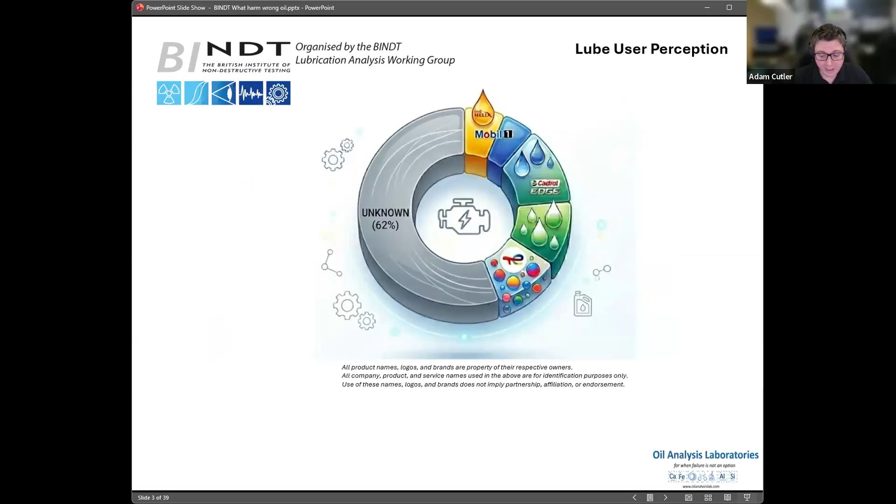If we expand that a little more here, we have what are the most common brands people use - unknown is number 1. Then there's 'I think it's Shell,' 'I think it's Castrol,' 'I think it's synthetic,' or it could be a mix - so it's a mix of one, I topped it up with another. Not knowing the right oil is actually a real problem in the industry.

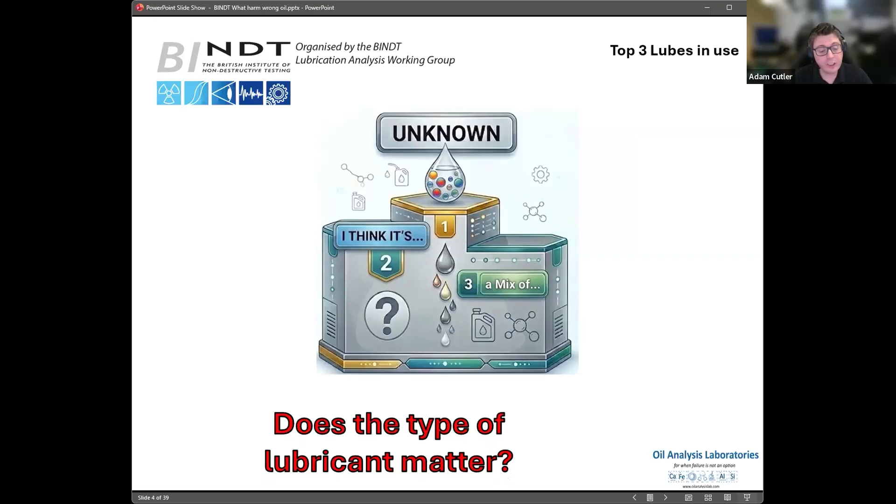Let's talk a little bit about the function of a lubricant. The most obvious one people think of is it reduces friction - separating the surfaces and allowing the components to move past each other. We also think of it as preventing wear - obviously you don't want things to wear. It can also dissipate heat. We also want it to prevent corrosion - so if we get water into the system, we want it to remove it and prevent it from causing corrosion to components. It can also clean.

This can be through additives, so detergents, but also physically just transporting the oil to a filter that does the cleanup job. An overlooked feature is the ability to seal. If you take an engine, for instance, the piston rings are often thought of as sealing, but it's actually that little tiny layer of oil beyond the piston rings, between that and the cylinder liner, that does the final seal to prevent leakage of combustion gases.

And then anyone who's in the hydraulic industry, there will be the ability to transmit power and dampen shock as well. So let's start off with the first one: reducing friction, which is the one that most people think of when you think about what's the function of a lubricant.

So what affects friction? Well, there's a few factors, but one of the key ones is the viscosity. Viscosity is resistance to flow, but in layman's terms, it's how thick an oil is. We can see here, on the left-hand side we've got a very thin oil, and on the right-hand side a very thick oil. Obviously it has more resistance pouring from one container to the other, so it pours more slowly when it's a thicker oil.

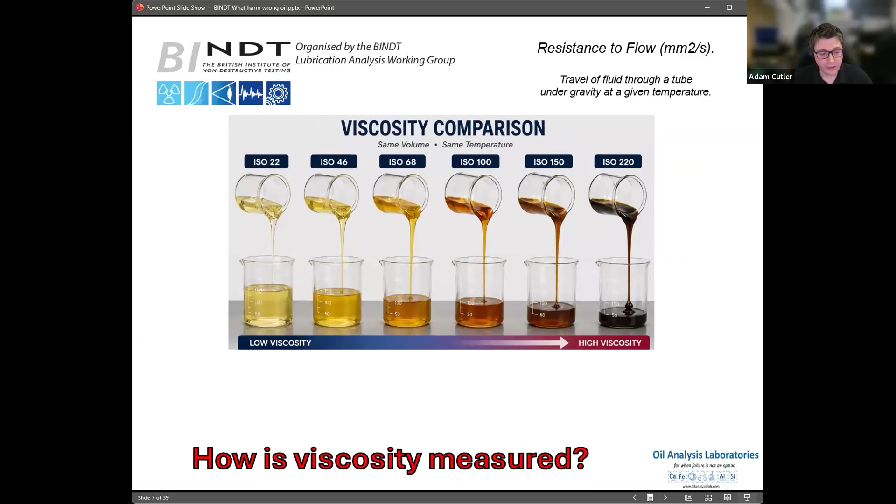So how do we measure viscosity? There's several ways of measuring it, but a common way of doing it is kinematic viscosity, where you have an oil-filled bath, and under gravity we drop the oil down one end of a viscometer tube. It then reaches the final point at the bottom under controlled temperature, and by the time it takes to get from one point to the other, we know how thick the oil is.

So if we just take this bath here, on the left-hand side I've got three tubes I've highlighted for you on screen. You can see I've highlighted those there. If we put some oil down each of these tubes now, we can see that this one on the right-hand side has actually hit the bottom before the first one, although that started first. Now the reason for that is a much thicker oil has more resistance to flow, and so takes longer despite starting earlier.

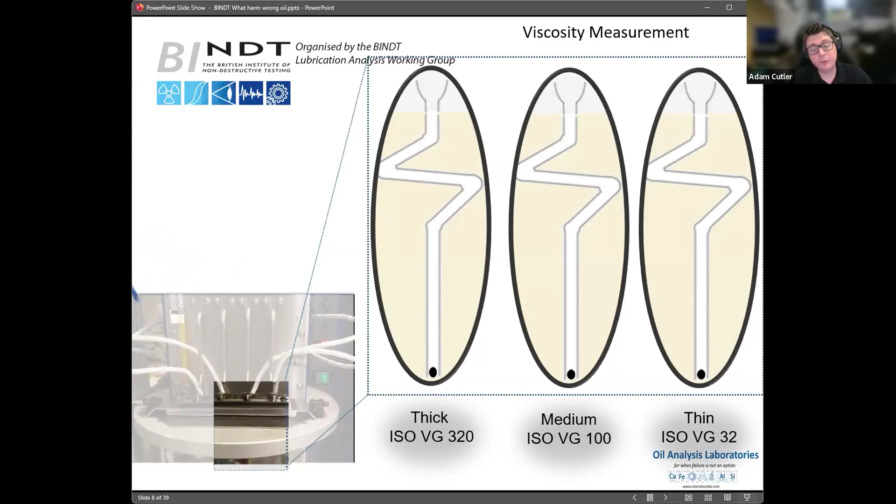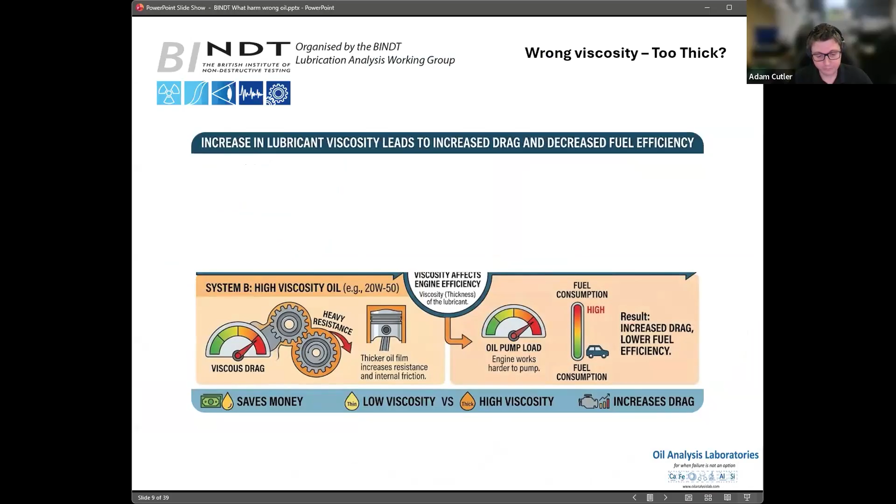So what happens when an oil is too thick? If we think of something like an engine, obviously if you're trying to move components with a very viscous oil, that's going to give a lot of resistance and a lot of drag. That's going to lead to increased pump load and also lower fuel efficiency. Whereas a thinner oil is going to have less drag, so it's going to be easier to flow and easier to pump around, giving better fuel economy. And that's why a lot of modern formulation oils tend to be thinner, because it gives less drag and better fuel economy as a result.

But can it be too thin? This actually brings us into our next area, which is preventing wear.

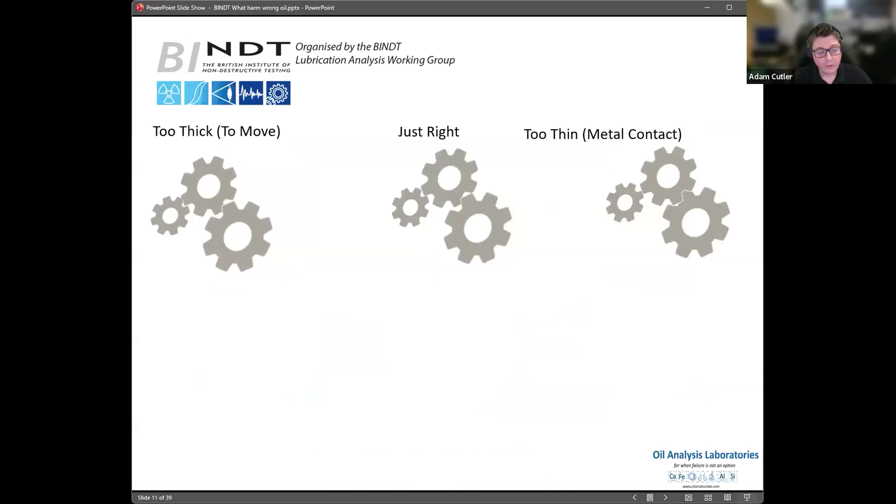So a too-thick oil, as I highlighted before, gives high energy consumption but a really good film thickness. In contrast, if something is too thin, you get better fuel economy, at least at the start, but more risk of metal-to-metal contact. So you don't want an oil that's too thick or too thin. You want this Goldilocks zone of something just right that's thick enough to give surface separation, but not so thick that it leads to increased drag and increased energy consumption.

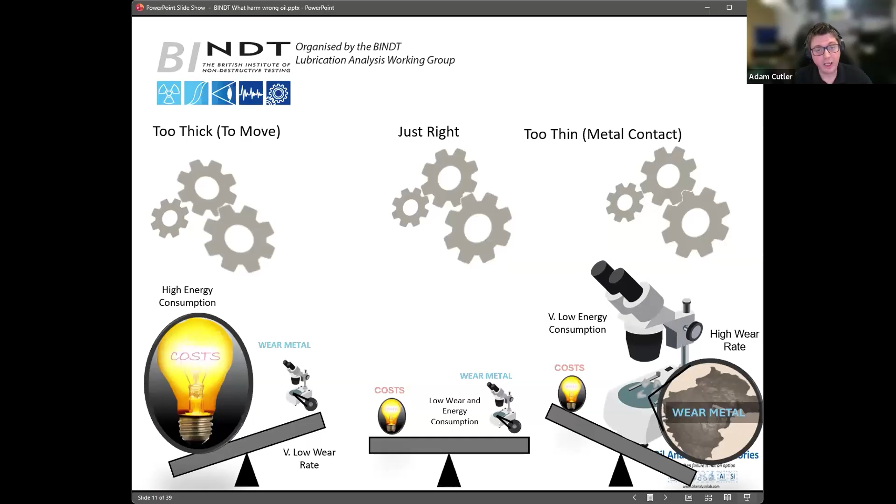So what happens to the film thickness? If we take a brand new component, let's say a plain bearing, as the surfaces move past one another we think of them as being perfectly smooth, and they look perfectly smooth to the naked eye. But at a microscopic level, they have surface imperfections called asperities, which give little peaks and valleys as the surfaces move past one another. You can imagine these will bump into each other as we move them, and as they move past each other, we get material breaking off.

These deposits then react with lubricant additives and form what's called a shear mix layer, or boundary lubrication. Under normal circumstances, you have the full fluid film thickness, with the oil separating the components. But under reasonable load, not overloading, you can have the actual surfaces come into contact just through the additives themselves. If you take this too far, though, you get metal-to-metal contact, which is abnormal wear. So boundary lubrication is typically normal wear, but if you overwhelm that, you get abnormal wear, and metal-to-metal contact leads to sliding wear.

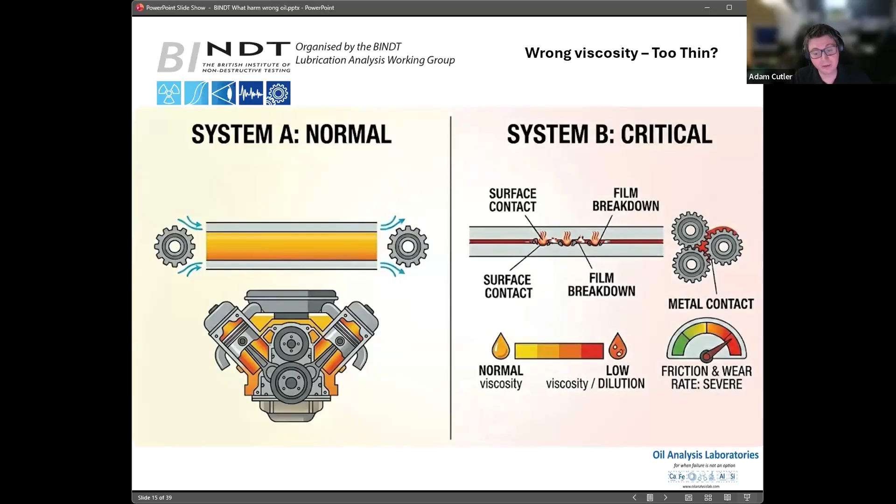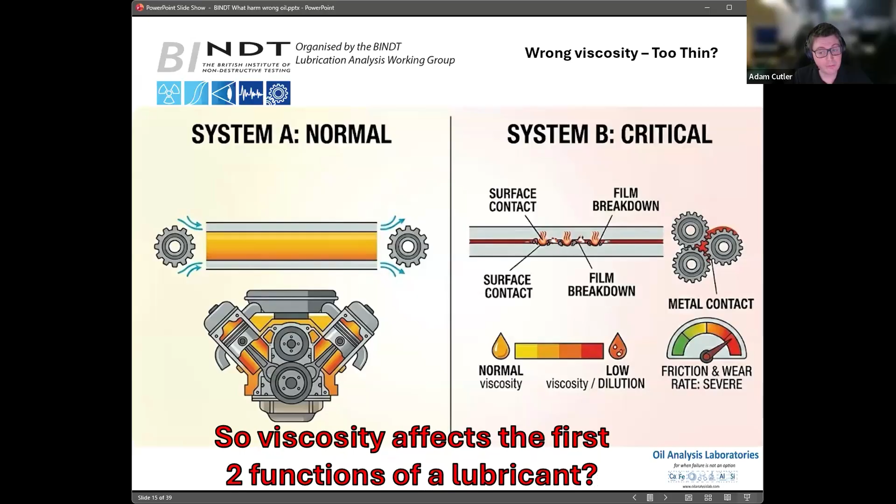So I've already pointed out that viscosity affects the first two functions of a lubricant. And that's because viscosity is the most important property of a lubricant. So much so, I'm going to talk about it again now. So we talk about dissipating heat, and we talk about viscosity index.

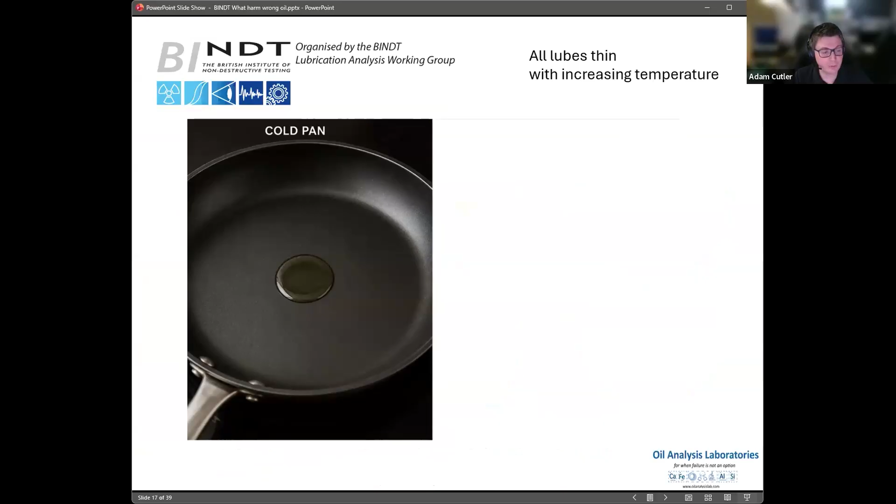So I described earlier when we talked about viscosity that we have a temperature controlled bath. Now that's because all oils thin with increasing temperature. So if we just take a classic thing, I always think of this when I'm cooking: if I've got a cold pan here and I put a blob of oil in it, when I heat it, that oil spreads out across the pan. That's because it is reduced in viscosity and so has less resistance to flow, so it flows around the pan much easier.

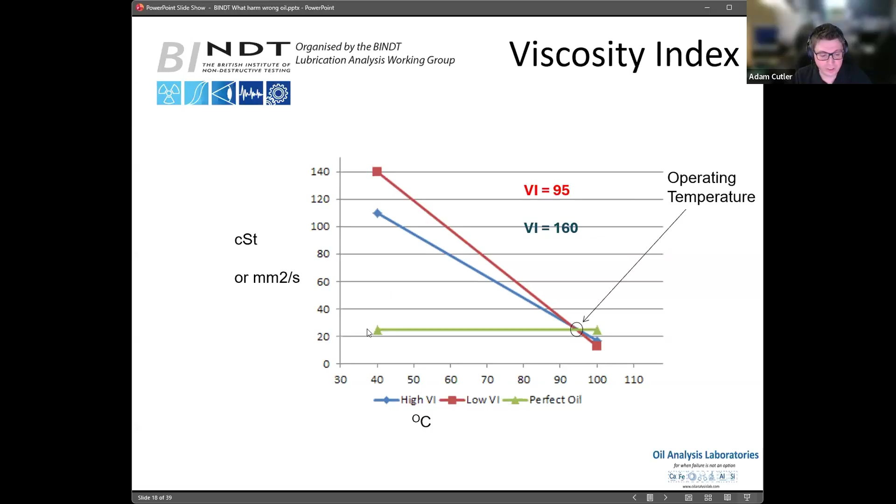So who will this suit? Someone who's working in these cold conditions, trying to start the engine—they want this to be as close to this perfect line as possible because they want it to not get too thick when they're at colder temperatures.

But this doesn't necessarily suit everyone. If we take an oil that is being used to transfer heat away from a component, you actually want it, as soon as it heats up, to get very thin very fast so it can flow away and allow fresh cool oil to go and cool down the component. So a very, very low viscosity index would be desirable in those circumstances, as opposed to the high viscosity index when you want good temperature stability.

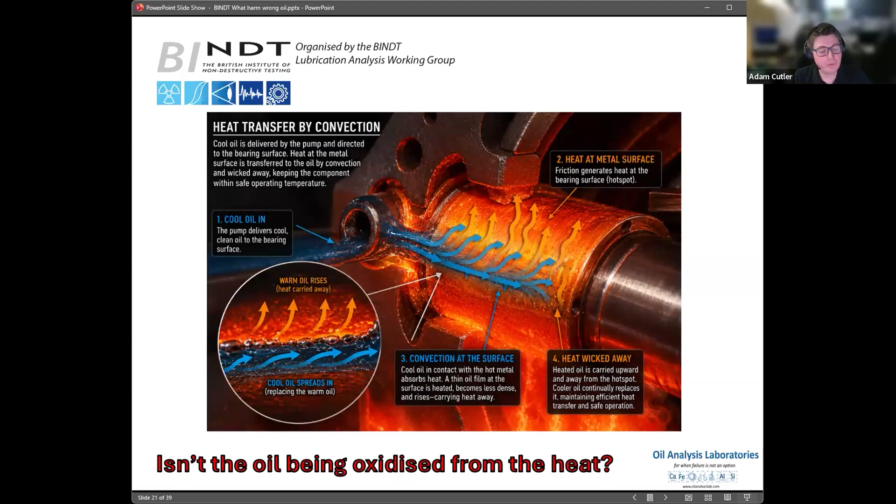So another thing you may be thinking of: isn't the oil being oxidized from the heat here? So this is where we come on to prevention of rust, corrosion and oxidation. All lubricants contain anti-rust and antioxidant additives, called an R&O additive package. So all oils contain these in their lubricant formulations—it's part of the basic oil formulation.

So you could argue, are all oils suitable for corrosion prevention? Well, it depends. If we take something like an ester—there are several types—some key properties: a phosphate ester has good fire resistance. A biodegradable ester, by the name, has good environmental credentials, but they're also good solvents, and they tend to have very high viscosity indexes as well. So all these could be desirable properties.

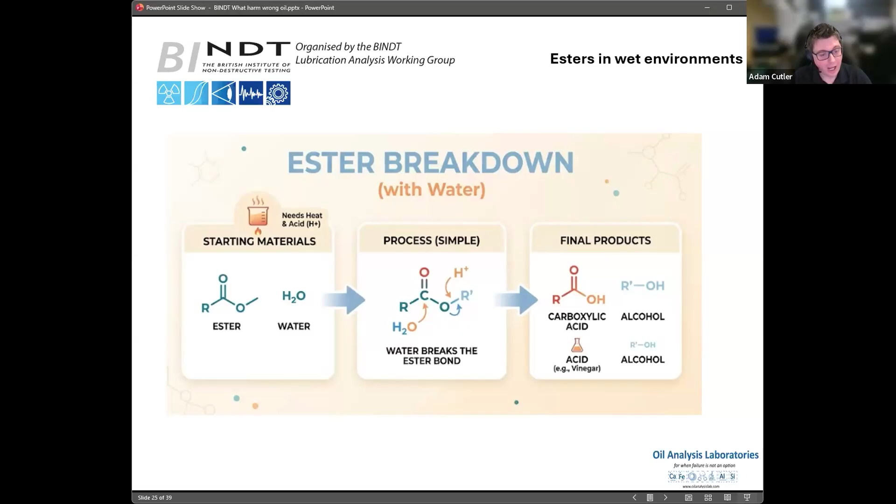And they'll all have rust and antioxidant additives in their additive package, but esters are made from acid plus alcohol equals ester plus water—but we can reverse that reaction. So if we add water, we can split the ester back into an acid, and that acid can cause corrosion. So in this case, a wet environment is not the ideal circumstance to use an ester-based lubricant.

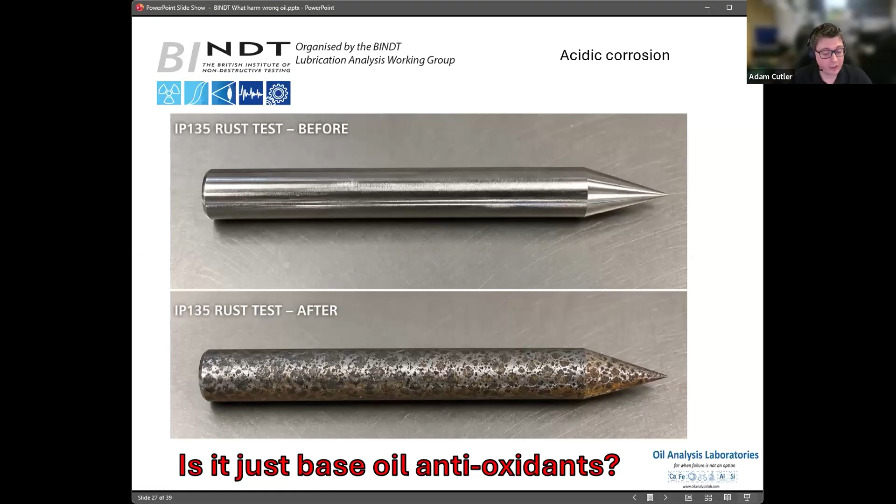It can also be other additives. A common one is EP, extreme pressure additive, used in many gear oils, which gives that sulfury, unpleasant smell you notice in gear oils. These are really good for wear protection, but one disadvantage is that EP can attack copper components, which can eventually lead to copper sulfide formation and, over a very long time, tarnishing and dissolving of components in a gearbox.

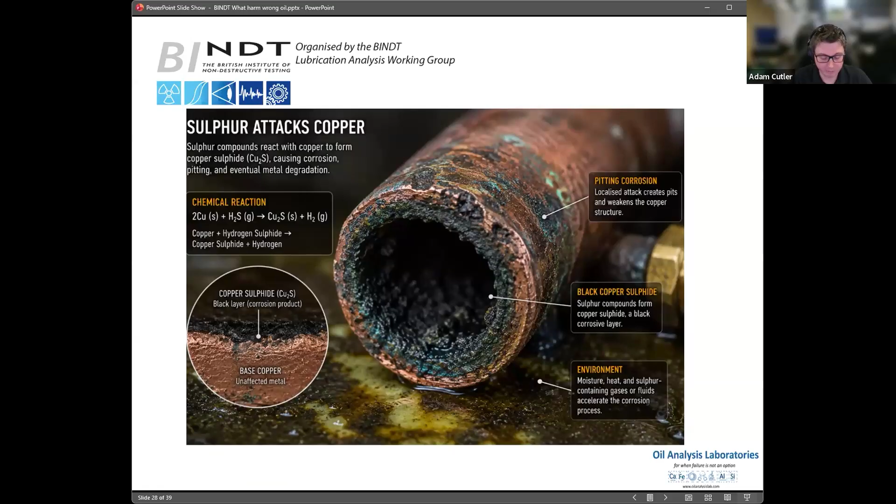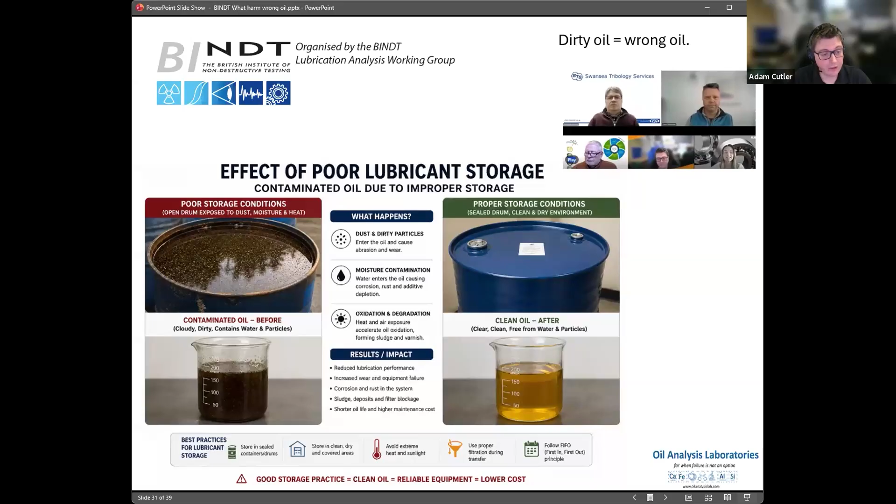The function of a lubricant also includes cleaning and transporting debris. What I want you to get from this is that dirty oil is the wrong oil - if the oil is dirty, it's not the right oil for you. I won't go too much into this, because the next presentation will be Dimitri's, so you've got something to look forward to hear more about contamination effects.

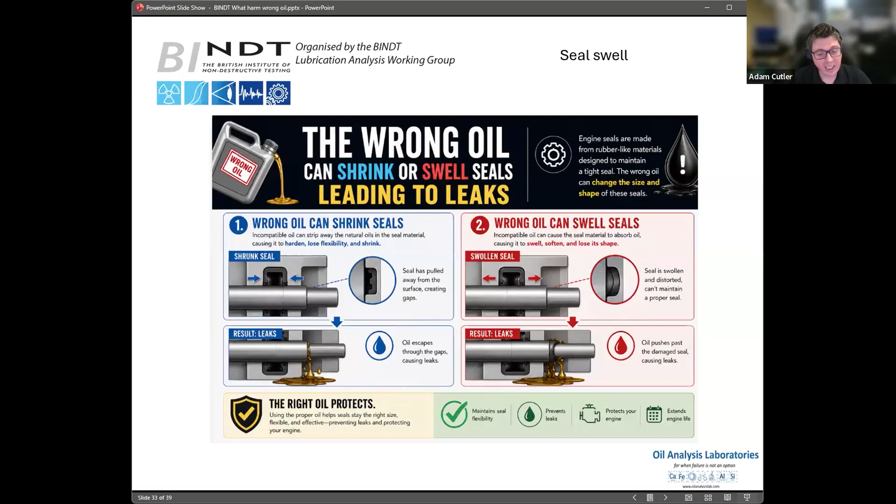Lubricants are also required to seal, as I mentioned before. A common issue is when switching from one brand or type of oil to another in large lubricated systems, which can lead to shrinkage or swelling of seals, causing them not to sit right in the housing and leading to small leaks throughout the system. This is one of the things to check when switching large oil and lubrication systems - seal compatibility.

Some ways you can do this: you can measure an aniline point, essentially the aromaticity of the product, which gives an indication of how compatible the oils will be. You can also do direct specimen testing - take one of the seals with the old oil and the new oil and see what the swell effects would be on that specimen.

We also want lubricants to dampen shock and transmit power. If any of you have ever put your foot on the brakes and it hasn't gone too well, this can be down to air in the brakes. Obviously that's a safety issue, but this also happens in anything involving hydraulic power.

Air is compressible, so foam in a lubricant or a high air release tendency can lead to uncontrolled movements and safety issues. But also, over time, because air is compressible, that air gets superheated, and the heated air will burn the oil around it and form little soot particles - a process called microdieseling, where the oil actually starts to soot over time.

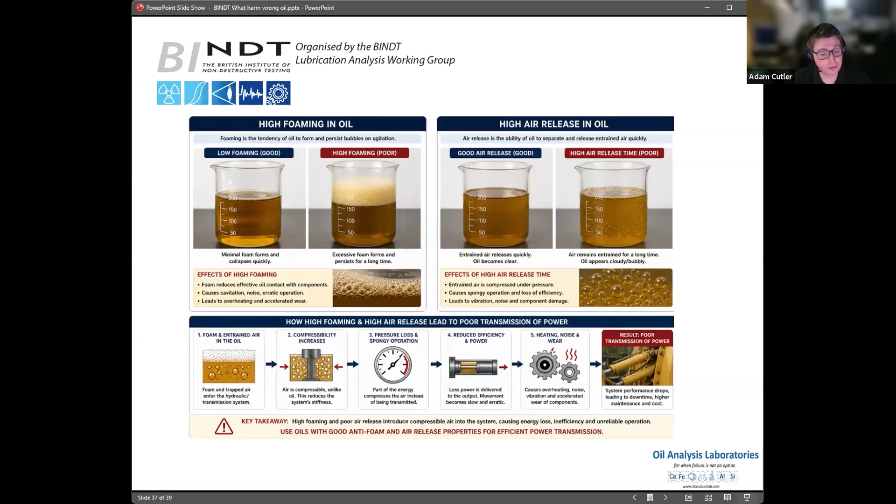In conclusion, oil analysis assesses all these parameters and looks at whether you've got the right oil for the right purpose. It looks at viscosity, to see if you've got the right film thickness; elemental analysis, to see if you're getting wear and have the right additive pack; infrared, to confirm you've got the right type of lubricant; and viscosity index, to see if the oil is working correctly across different temperature ranges. It also measures how spent a lubricant's additives are and how much resistance a new lubricant has to depletion, as well as corrosion, air handling, and water handling properties - and all of this can be found out from a single oil sample.

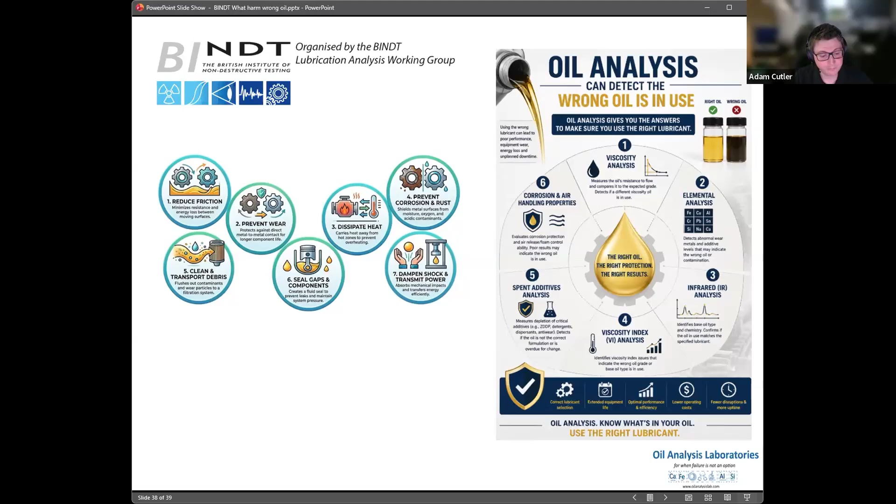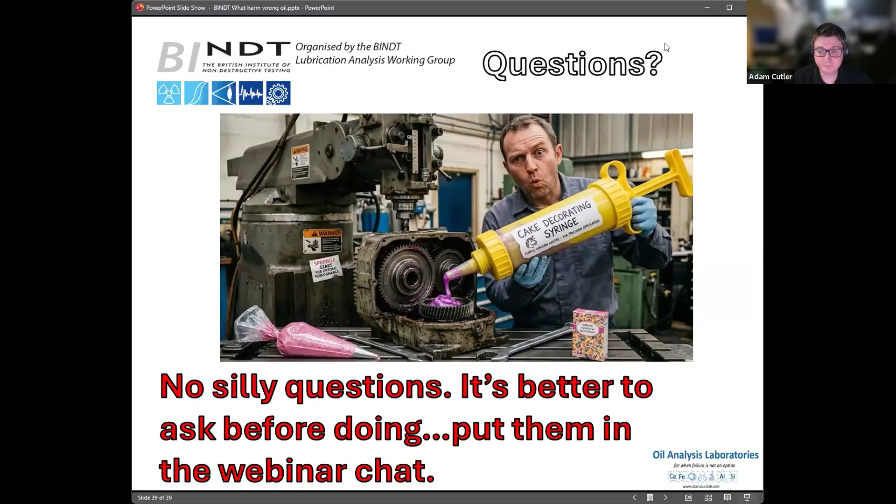Thank you, Adam. That opening message that you started with is really key. The most common oil type in use is unknown. My background is oil analysis lab, the same as everyone presenting today, and that resonates with us all massively. And I think it's very important information that's often overlooked by end users. It's very difficult for us to distinguish between some contaminants and additives or failures if we're unsure what we're dealing with in the first place. We often have end users claim that they don't have lubrication issues, so hopefully your presentation today has shown that a lubrication issue doesn't always appear to be mechanical on site.

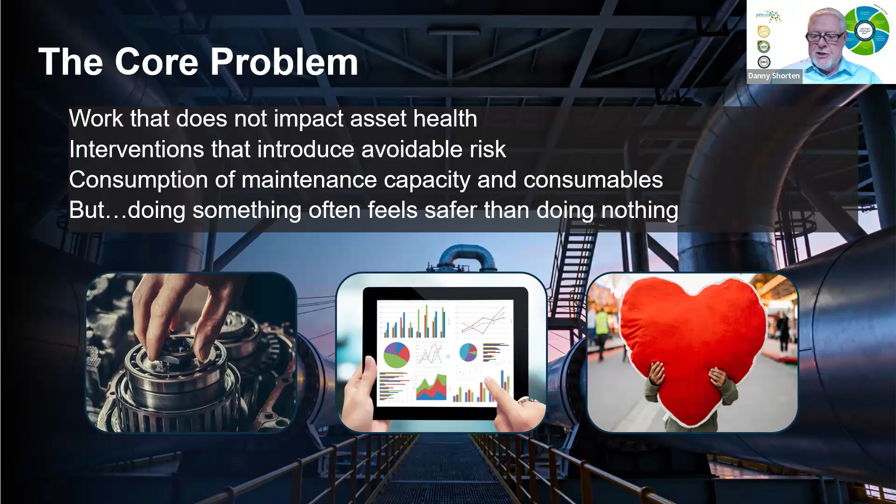So we're consuming maintenance capacity and the consumables, but we're not really aware of whether that's necessary or not. However, doing something often feels better than doing nothing, and I'm going to argue the case that actually doing nothing sometimes is actually better than doing something.

Now, when we look at a sort of medium-sized site, the calendar structure would normally look like this. So if you've had an oil survey or you've updated your maintenance management processes recently, you'll be doing oil analysis on probably your critical items. And these will tend to be driven by the sump size, i.e. the ones with the most oil in, or the criticality to operation. And you'll be sampling them on a monthly or quarterly basis.

The smaller systems, where you are not really happy to make a commercial decision to take an oil sample, box it off, send it to a laboratory 4 times a year or 12 times a year, these will be on some kind of fixed schedule. Nominally, a 3-year oil change and an inspection process for top-ups. Your grease systems will be visited according to a calendar schedule. Somebody will walk a line with a grease gun and they will apply grease according to that schedule.

So the truth of the matter is, let's say in this example we've got 250 lubricated sumps, only 10% of those are going to be sampled, so you've only got knowledge of the internal condition of the oil and the machine in 10% of those assets. So 225 are unknown commodities.

Now we can inspect from the outside, we can have a look for leaks, we can do all sorts of stuff, but we don't really know what the condition of the oil is, so we're going to change it based on a calendar basis. So 225 oil changes we're going to do whether we need to or not. And that equates to about 75 oil changes annually. So that's more than one a week if you spread it out.

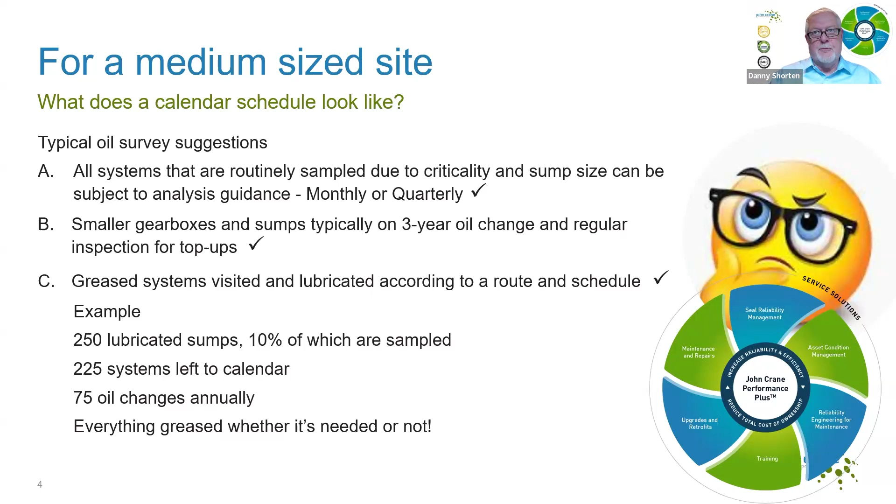And in addition, everything is greased whether it needs to be or not. And that leads to a problem because we can under and over grease systems and we may or may not know what we're doing. So can we do it differently?

This is the question I want to ask everybody. Can the oil be changed or a system re-greased only when it's necessary? Well, the answer is of course yes, but there's a commercial consideration as to how we achieve that knowledge.

So if we know that the oil is unsuitable for further service, then we'll change it. But if it's okay, we can leave it, but we need that knowledge. If we know it's contaminated beyond repair, so it's something a filtration system can't deal with, then we can change it and we can clean it. But if it's clean, just leave it.

If the oil's degraded, same thing. Change it or leave it. But if we can prove that we don't need to do it, then we can leave it. And it's not negligent, it's an active decision. So we're actually changing something from a scheduled activity to a decision window.

Now the sort of things that we can do on site, for instance, because the solution is to test on site, is to look for the issues Adam was talking about earlier. Is it the right oil? Is it wet? Is it dirty? Has it aged? And there are on-site tests we can do for that.

We're not concerned here about machine condition, we're simply interested in the condition of the oil, i.e. can we leave it there or do we need to change it? So I'm not really interested at this stage in wear metals. If I was, I would send it to a laboratory or I'd build a mini lab on site to do that, but this is not the purpose of the discussion today.

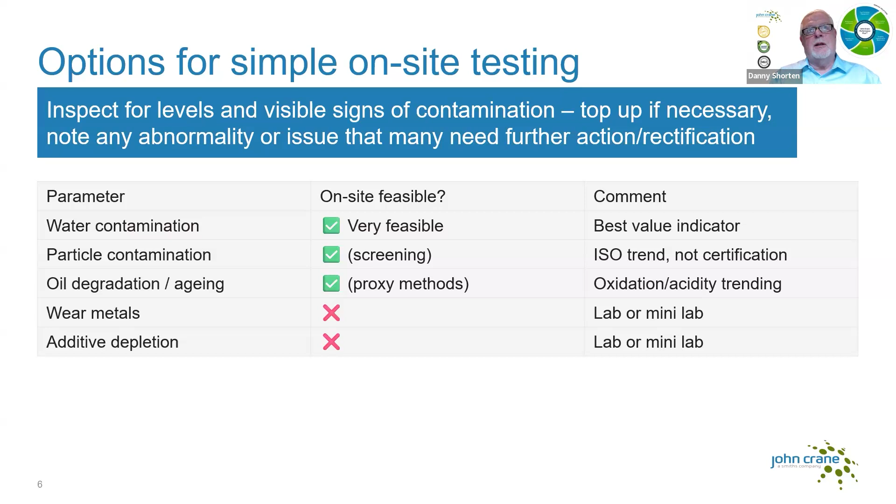Similarly with additive depletion, we're not really looking at that, although there are some devices that can help us. So what tools are available? Now this of course depends on the commercial argument for doing on-site analysis.

We can do simple things with water, such as a crackle test. We can do more involved testing using, for instance, the Spectro Fluid Scan handheld IR, which is quite a high value asset, but gives us a lot of information around the condition of the oil. So that can produce a go or no go, but there are costs involved there.

We can do patch testing where we actually take an oil sample and provide a filter patch, and we can use microscopy. There are other devices which can look at relative contamination and oxidation, and field tests for TAN, for water, etc.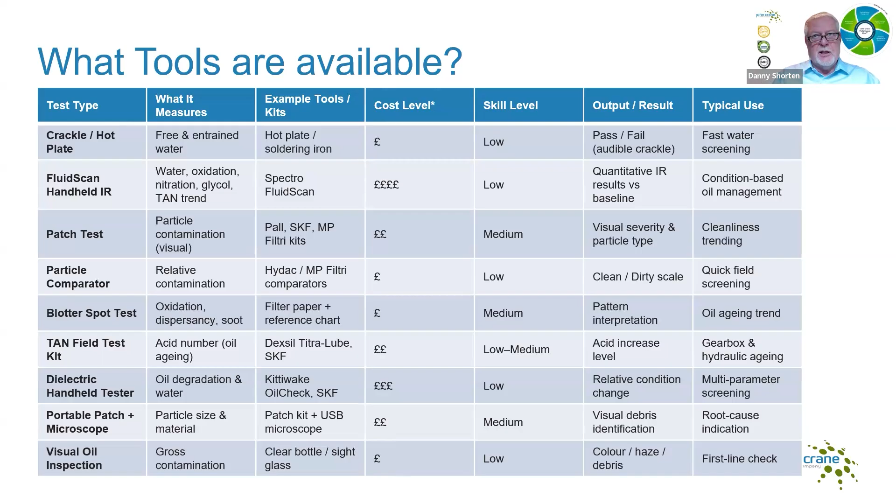Now, I'm not going to get into the solutions here, but there are many opportunities and options to do this. Now, what my view is, because we've got a massive proliferation of sensors and we're using AI, we can use an off-site laboratory, and I certainly wouldn't suggest moving away from that. We can also do stuff on site as well, and we can gain knowledge about our equipment, even if it's very basic knowledge - we take a very small sample and do some kind of qualitative assessment. This is good sense - we're managing the risk, not just ignoring it.

So any system managed by a calendar leads to unknowns and represents a risk. I recently went to a company and they said, we don't change oils, we don't have problems with gearbox failures. When we dug a bit deeper, they were just used to doing refurbishments at a frequency which I would have considered to be excessive, but that was business as usual for those guys. So you may or may not know you've got an issue that you can improve on.

We tend to manage risks we're aware of by over-maintaining, and in doing so we introduce more risk. If we take a component out of service to do something to it and put it back into service, we actually create a new infant, and therefore because it's now a new asset, we're introducing a new risk because it's further down what we call the PF curve, where the potential for failure is increasing simply because we've taken it apart and put it back together. So the argument here is working smarter, not harder, and certainly not deferring without any understanding of risk.

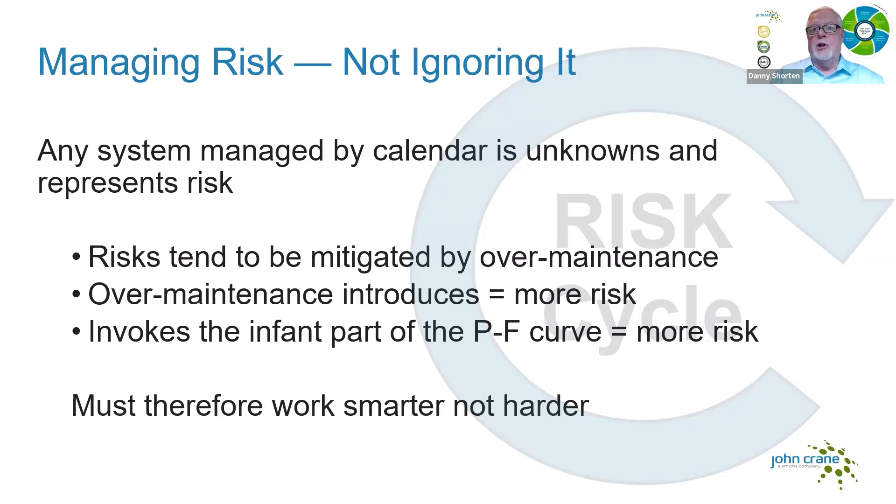So we need to have the knowledge in order to make the decision. Now, we've done some work on a number of sites, and we can report quite confidently that there's likely between a 10 and 30% reduction in oil consumption, which at the moment is quite a critical thing to talk about, based upon what's going on in the world and the knowledge that we're going to have supply issues, not only from the base oil and the refineries, but some of the finished products are going to be hard to get.

You'll probably have seen some messaging from distributors or oil companies that pricing is going to be impacted. But we're also going to see potentially a significant reduction in lubrication-related work orders, i.e. stuff we do because it's in the schedule but probably don't need to do. If we're not getting involved with those assets unnecessarily, we've got fewer contamination-related failures, and we're more likely to adhere to the schedule because we're doing stuff which is relevant. So why does this matter?

Well, the standards of our operations influence behaviour. If anybody's ever done an assessment of any company's lubrication management, they will very soon realise that it's the culture of lubrication which is often at fault. Not necessarily individual fault - it's a corporate culture around lubrication management where it's been effectively flattened and forgotten about, and it's assumed to be running within reason.

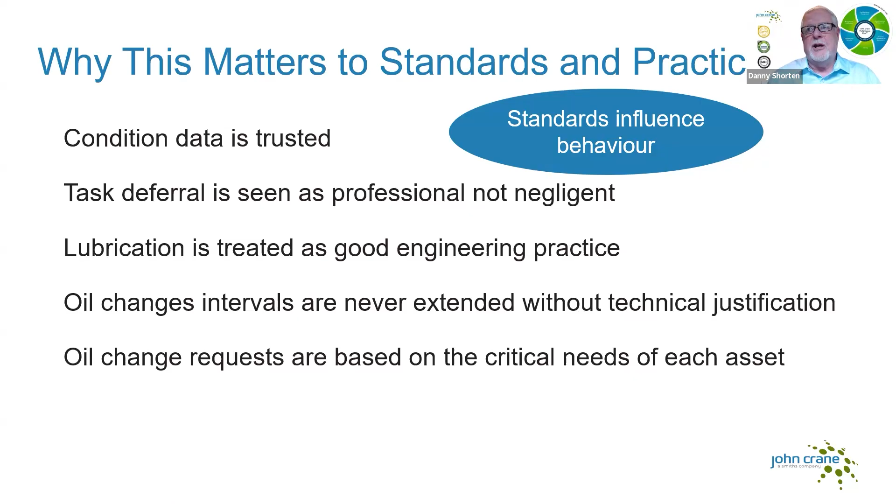So why does this matter? Well, if you're using fixed time-based intervals, there is no relevance to the need of the asset. This is simply a tool to make work planning easier. It doesn't necessarily give you any value.

If we're looking at OEM guidance, for instance, when you look at the handbook, they'll say perform an oil change every 70 miles or 70 hours or whatever. And I would argue that if you're taking an industrial gearbox, the amount of potential context that gearbox can be put into is going to be much more significant than the handbook's going to really relate to. So the handbook, in many ways, protects the manufacturer from negligence because it can hold its hands up during warranty and say, you didn't follow our instructions. But out of warranty, it has no value.

So actually, maintaining the condition of the oil is very much relevant to your operation and your condition. And that may mean changing it more frequently or actually less frequently.

The problem with schedules, again, it's very much focused on convenience. It's about the planning aspect, not necessarily the needs of the asset. And when you have something which is not based on the needs of the asset, schedule compliance, which is very often a metric that we use to measure how good we are, has no relationship to the reliability. It means you've done something, but it doesn't necessarily mean you've gained any benefit.

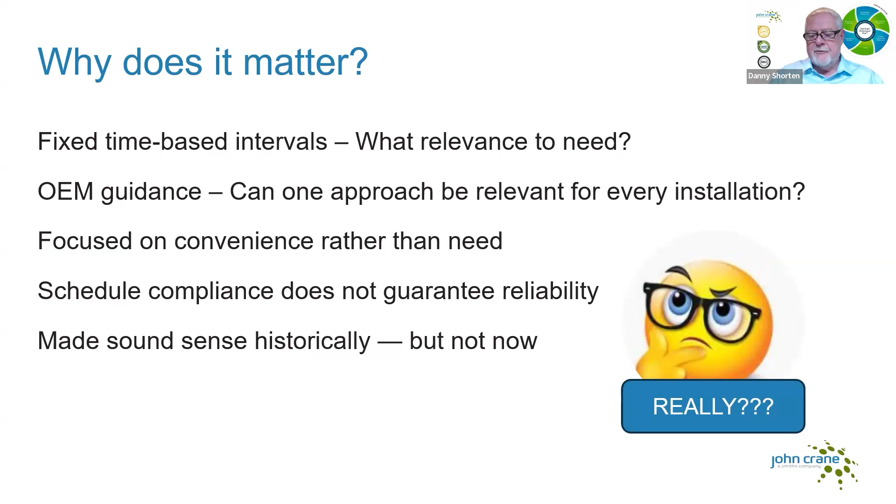And these, I think one would argue, historically were very sound views, but this now is changing because we can access more knowledge and have the ability to make better decisions.

So what costs happen? Well, we have to pay for labour, we have to take the asset out of commission, we've got to manage any spills and contamination, we've got to expose individuals to health and safety issues, we've got waste, we've got potential errors due to human errors and perhaps training issues. And of course, we're now focused on work that is not rewarding us. We're focused on work which is simply a scheduled compliance task, creating unnecessary work, unnecessary costs, and unnecessary risk.

So instead of seeing an oil change interval, why not make it a decision window? This puts the power back into the engineer and the reliability management in actually to do something that adds value, or to avoid it in the knowledge that risk is still being managed.

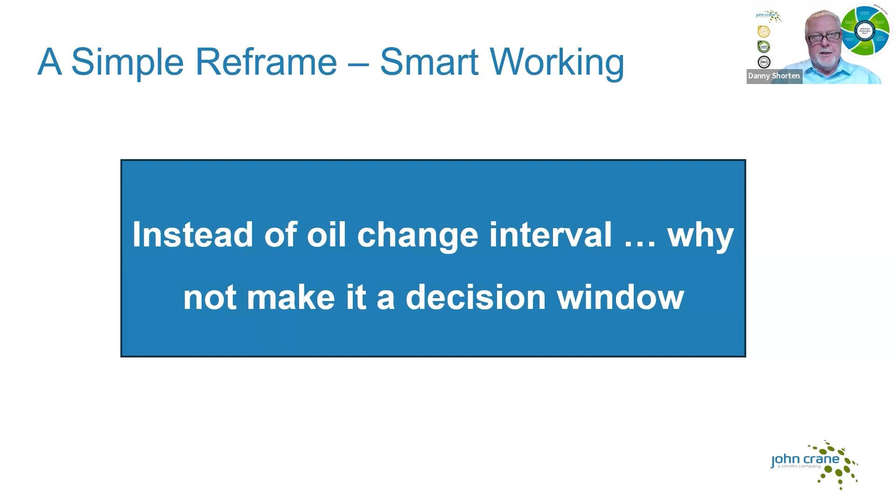So when we're using a decision window, when we get to the prize, we can define the acceptance limits and alarms for every system. We make decisions based on evidence as opposed to simply because it's time to do something, because it's the 4th of June and that's what we do on the 4th of June. We've got a clear authority to defer and extend oil change interval with time and date stamped verification of status, which gives us a feedback loop to confirm these decisions are safe. And we have confident knowledge of condition.

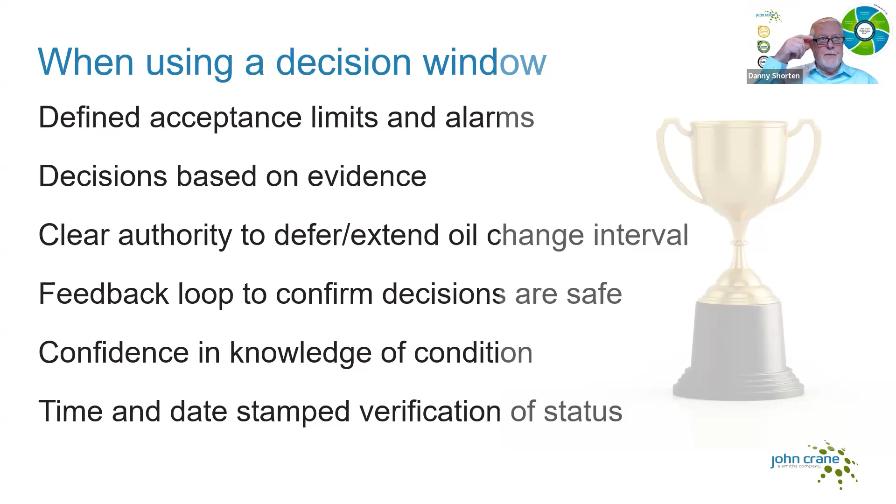And in the first year of the trial, they actively identified that 90% of the systems did not require oil change. Now, over time, that number will drop because oil will require changing at some stage. But they actually avoided oil change on over 2,000 systems. And their calculation, not mine, was actually quite significant in terms of the first year. And they recovered their capital investment also quite quickly in that period of time.

Now, noting that that capital is probably going to need replacing in 5 years, they've got 4 years of access with the only cost being actually taking the sample. Their prediction long term is to permanently eliminate 50% of the previously scheduled oil changes through a condition-based decision making with appropriate risk management. And they are now mapping this out to other sites.

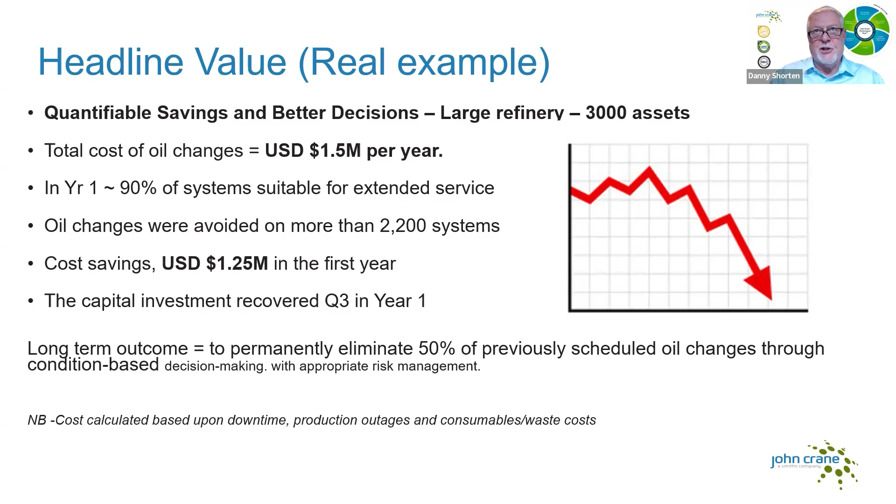Now, admittedly, this is a large group of assets and that may not be relevant for everywhere. But the process suggests that at least we should ask the question, is there an opportunity to move, maybe not all of the assets you don't put in an oil condition monitoring program, but some more assets into that so we can avoid unnecessary oil changes.

So I'm coming to the end of my 20 minutes. My key takeaways are scheduled oil changes feel safe, but they add cost, and we can see that cost can be quite considerable.

Condition data, if we can acquire it and trend it, adds a degree of certainty to our decision-making processes. And this new activity does not necessarily require any significant training or upskilling. We use very competent people generally, and giving them the skills and awareness to take lubrication to another level is quite straightforward, so long as it's built into the culture. So we also get value from avoided work, the risk reduction, and the added assurance that we are actually working based on data and intelligence.

And as you've seen, the value can be significant for medium to large size asset populations. And that ends my discussion today, and I thank you very much for your attention. Please, if there are any questions, we'll get round to it in the panel at the end. But for now, thank you.

Thank you, Danny. You have had a question come through, so I've made a note for that for later on. Condition-based lubrication is something which people are adopting more across all industries, and as you've shown, sometimes doing too much can cause problems, even in the smallest of oil or grease reservoirs. Understanding the condition is invaluable for improved reliability and sustainability, especially in this time of worry with lubricant supply. We certainly don't want to be changing oils and greases just because.

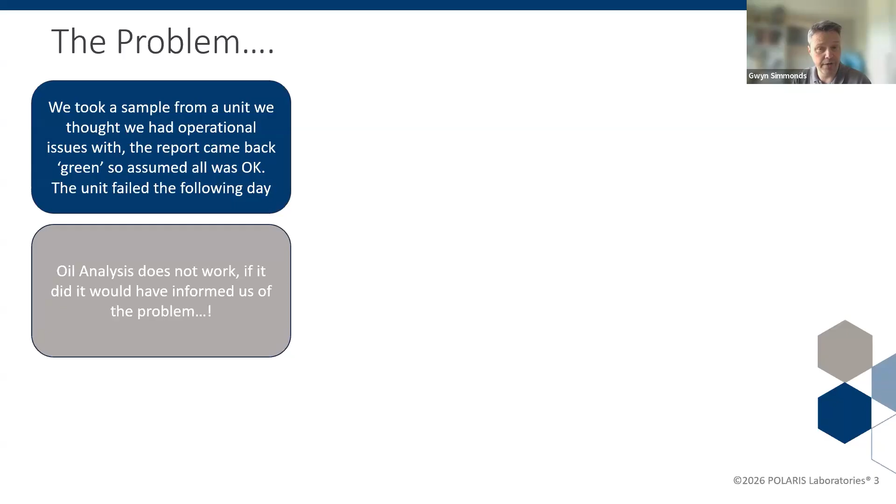So they then followed up with, oil analysis doesn't work. If oil analysis did work, it would have informed us of the problem. We may have saved or done some remedial maintenance on this piece of equipment to find the problem before it failed catastrophically. Oil analysis should have and could have given us the information and informed them of what that problem was.

They also followed up with, in fact, there have been a number of issues over recent years, not just with Polaris, but we transitioned to Polaris from a previous provider a couple of years ago, and there have been other issues where oil analysis has not picked up problems with pieces of equipment. Now, we all know from an operational standpoint, you can get catastrophic failures which oil analysis may or may not pick up.

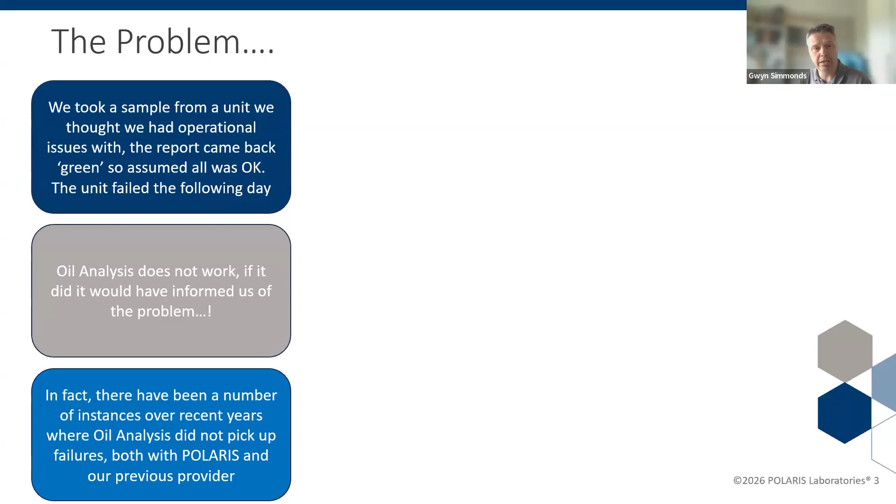But they had a general perception that it was potentially a waste of money. Now, was this because they were just paying lip service to it? Was it something they do because they've already done it? Again, it's important to find out the fundamentals of why this is their perception of oil analysis.

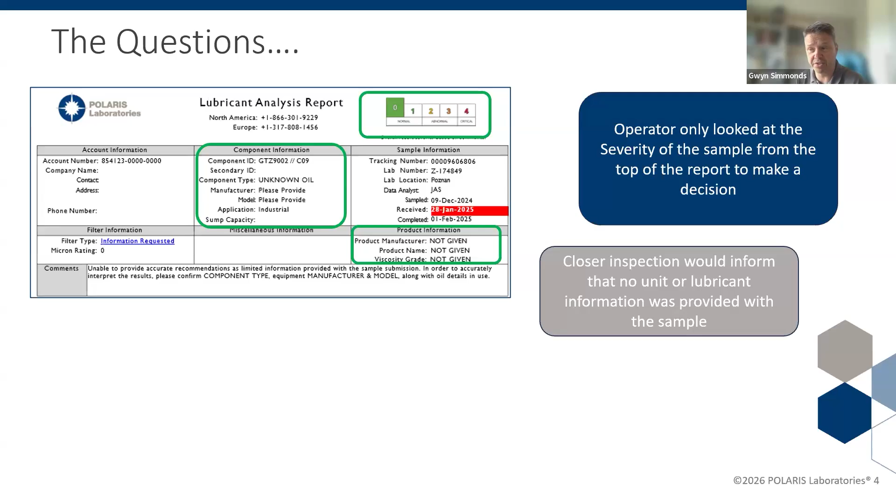Unknown. And this is an exact example of that. So it doesn't give us, as the lab, any information of what we're working with, or what we're trying to recommend.

And if the user had actually read the comments on the report - to be able to provide accurate recommendations, as limited information is provided with the sample, in order to accurately interpret these results, please confirm component type, the piece of equipment, the manufacturer and model, along with the lubricant details in use. Now, if that user had read those comments, they may not have made the decision not to do anything with this piece of equipment which failed the following day.

If they'd have read that in more detail, rather than paying lip service to 'we've taken a sample, we've sent it, there's nothing wrong' - understanding what information is on the report is just as important as looking at the overall severity as well. So really, the problem lied with the information we were provided by the operator, by the end user, with this particular individual sample from this equipment that fundamentally failed.

So for the rest of this session now, I'm going to explain that oil analysis does work, and here are some of the solutions based on providing accurate and informed data to the laboratory when sending samples in.

So what is the solution? Well, firstly, we need to take a step back and do a complete review of all of the data related to that program. That is the asset lists, the equipment lists, all of the information that's relevant to the lab when testing and interpreting that data related to that piece of equipment or those customers' fleet of machines that they're taking samples from.

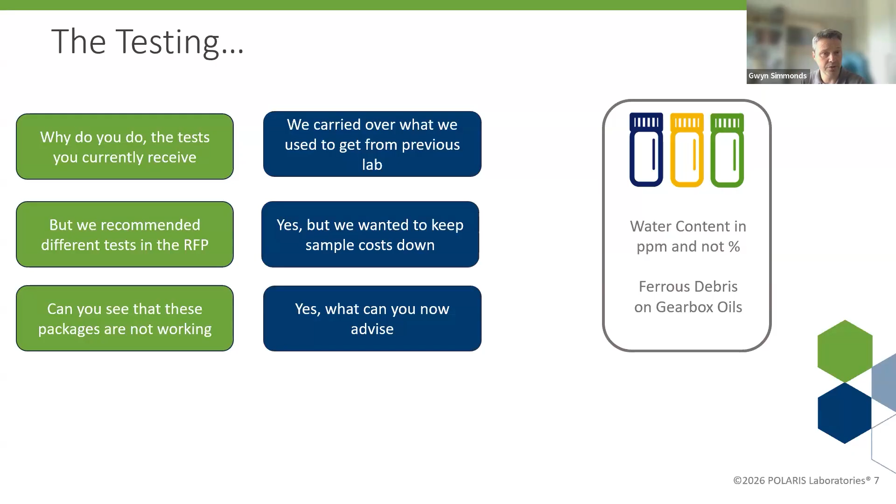A couple of the low-hanging fruit: they weren't performing water content in parts per million, just doing a carte blanche percentage across the board. Now if the percentage is via a hot plate method or an FTIR, that hasn't got the limit of detection to go down to maybe 200 or 400 parts per million, which could be the condemning limit for water contamination in some industrial applications. More critically, they weren't doing a ferrous debris test on their gearbox oils, which is vital to understand if there are any larger ferrous or iron wear patterns occurring in those individual gearboxes.

There's probably tens of thousands out there, and also tens of thousands of ISO 320 gear oils. They didn't give us the manufacturer, they didn't give us the model. So additive levels, specifications, formulations all differ. Having that information is critical for us as a laboratory to provide the most accurate information, because that affects not only the interpretation we provide and the severity of the report, but also the comments and recommendations we make and the limits we use based on certain applications.

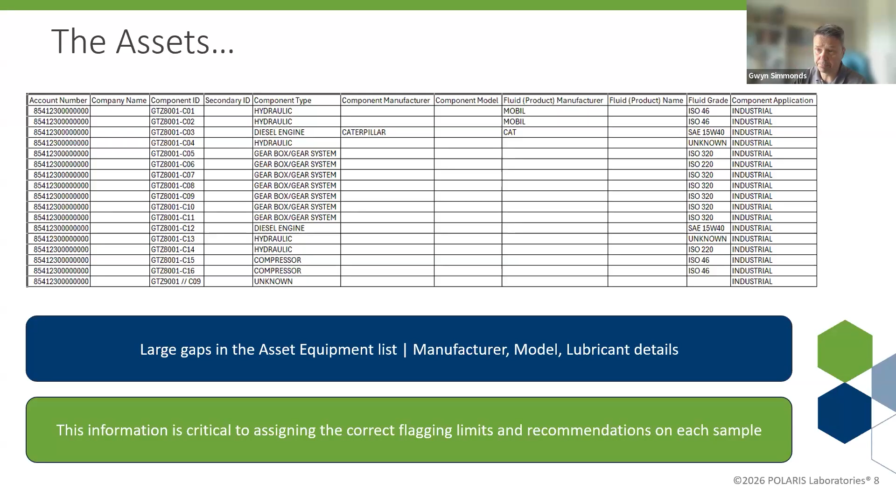And why is that important? Well, if we think of what information a laboratory uses with a sample that comes in, you have the laboratory test results derived from the sample as tested in the lab, and you have the equipment type. It's important to say what kind of engine it is — okay, we've sampled an engine, but is it a diesel engine? Is it a petrol engine? Is it a dual fuel, natural gas, or landfill gas engine? So having that exact type of equipment is important.

What type of gearbox is it? Is it a kiln gearbox? Is it a conveyor gearbox? These all have different applications, different duty cycles, different loads. So having that exact equipment type and application is critical for the most accurate interpretation of an asset.

As I said on the previous slide, the information on the fluid manufacturer, product and grade, as Adam pointed out as well, is vital for the laboratory to interpret against the correct viscosity, but also the correct additive levels and formulations, to ensure that the oil and lubricant in use is exactly as it should be, as taken out of the barrel from the lubricant provider.

And then obviously component manufacturer and model. There are tens of thousands of different engine or compressor manufacturers. They all have different metallurgies and will all wear at different rates as well. So having that definitive information on the manufacturer and modeling of the equipment is critical to ensuring the correct statistical models are used for things like wear and contamination levels.

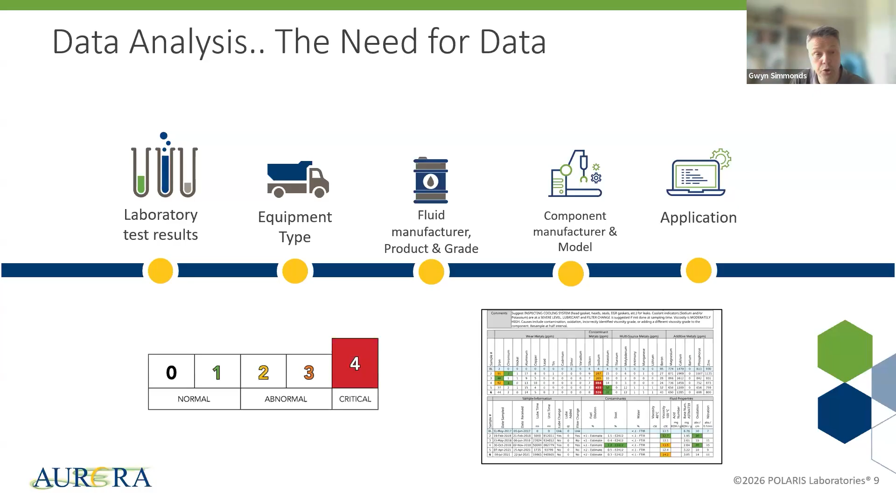There was a comment in the chat that ties into this slide about what are the limits, how do we know what's right and what's wrong. We have a data set of over 25 years, with over 21 million samples, which allows us to have 50 million individual flagging points and over 55,000 flagging templates. That's based on differences in the manufacturer, the model, the lubricant grade, the lubricant manufacturer, and the application as well. So we probably have the largest data set of oil analysis statistics, which allows us to confidently predict and flag certain data sets.

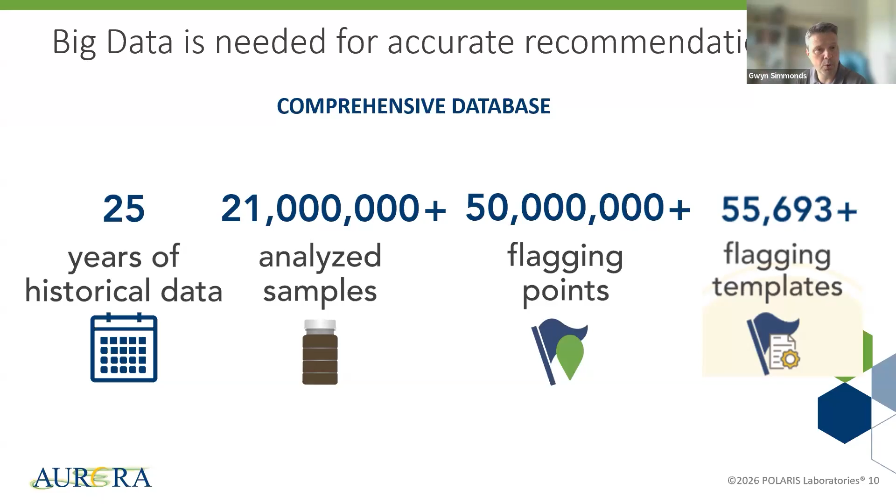Now, if the customer provides us with no information, we can just do a very generic interpretation based on it being a gearbox, using a typical data set or statistical analysis of gearboxes. But the more information the customer provides, the more we can drill down to a much more accurate statistical model in terms of providing that interpretation and recommendations.

So if we think about how important that information coming into the lab is, how do we fill in the blanks? If we take an individual asset where they said there was an impending failure but they didn't give us any information, you can see the manufacturer and model of the equipment was missing, and they gave us minimal information on the fluid type. But once they reviewed their records and found the manufacturer and model, and said we know it's Mobil hydraulic oil M in use, it gives us much better information on what is in use in that equipment. Any laboratory can then become much more prescriptive in their recommendations and flagging for that customer when that information is provided.

Now, Danny touched on AI. AI is becoming very prevalent in our industry in terms of customers extracting data, putting it into their own data sets and models to look at predictive analytics. But AI is only as good as the data set that feeds it. If you have a data set where most of this information is missing, the output from the AI agent is going to be significantly less powerful compared to where you have a fully implemented asset list with full manufacturers, full models, and full details on the lubricant information.

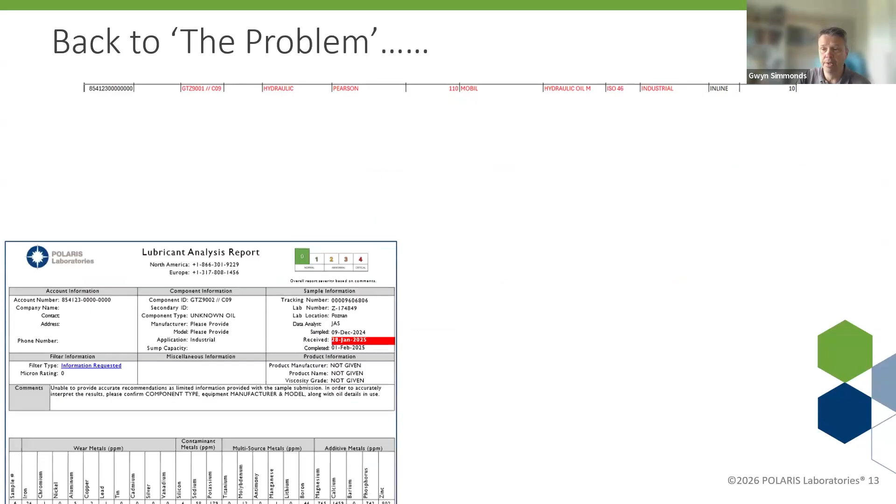So if we go back to the original report we saw on one of the earlier slides, it's unknown oil, unknown lubricant, and the laboratory is unable to provide accurate recommendations without this information.

If we look at the same report, now the customer has provided us with that vital information. We know it's a hydraulic, we know the manufacturer and the model, and they've confirmed the product in use. We can now make a much more informed interpretation and recommendations based on that additional information.

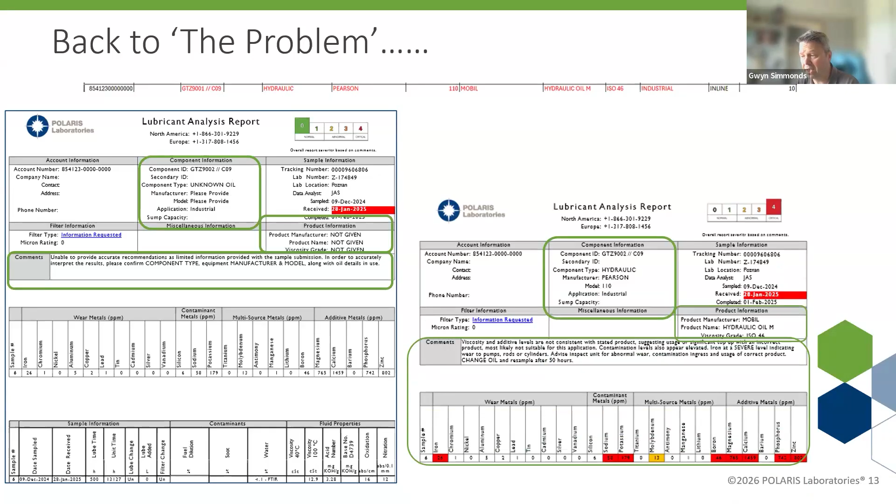And you can see here that a lot of the data is flagged. There's relatively high levels of iron, there's levels of contamination, and it's clear that the additive package in this particular sample is very different to what we'd expect in this hydraulic oil.

So clearly someone's either topped up or used the wrong oil, and therefore our interpretation details that the viscosity and the additive levels aren't consistent with the stated product.

We found ferrous wear, which could be coming from a variety of sources within the system, and the overall severity of the report is now red, or critical, or severe — a marked difference to the original report where we said it was green because everything was normal.

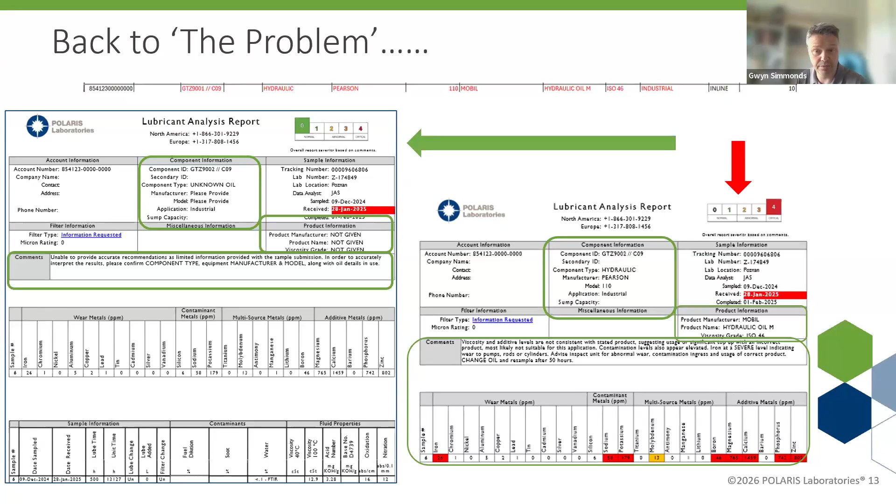So even if they didn't read the report or look at any information, and all they did was look at that top right hand corner, they would have seen it's red — oh, we need to do something. So even without in-depth attention, just the visuals on the report with that additional information would have led them to a problem with this particular piece of equipment that they needed to rectify, hopefully before it failed or was about to fail.

We put all this in place. The customer says, right, we want to keep everything clean. We now believe in oil analysis, we want to keep this kind of consistency moving forward. What are the best options?

Now a lot of labs have a mobile app, and the mobile app can be used for sample submission, allowing you to transfer sample information at the point of sampling to the laboratory. Just think how clean and accurate this is compared to a historical, traditional handwritten form where customers handwrite the asset ID and the information.

They could miss information on there as well. Whereas with the electronic submission, it's very quick and easy to put the component time, the age of the equipment, the age of the fluid. Was the oil changed? Yes or no. Was the filter changed? Yes or no. Quick and easy, takes about 30 seconds to do — put a QR code on the bottle, and the lab gets that accurate information.

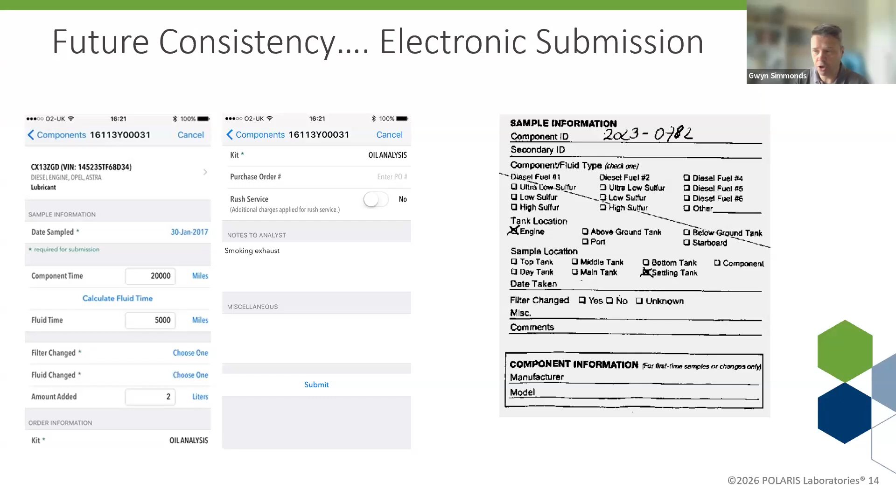What it also prevents, versus the traditional paper version, is duplicate IDs and loss of historical trends. So really, moving forward to keep the data set as clean as possible and future-proof it, electronic submission is the way forward compared to traditional handwritten methods. Probably about 60-65% of our business globally uses electronic submission, which is good, and good for the environment because we're providing less paper to customers.

If you've got good data sets, as I mentioned before, from kind of an AI output, it also allows the labs to perform better data analytics. Now, if you have minimal information on manufacturer, sample type, or lubricant, you can't really do that high level macro data analytics on the complete data set. This complete data set could be for one location, or for a multinational company with multiple locations nationally or globally.

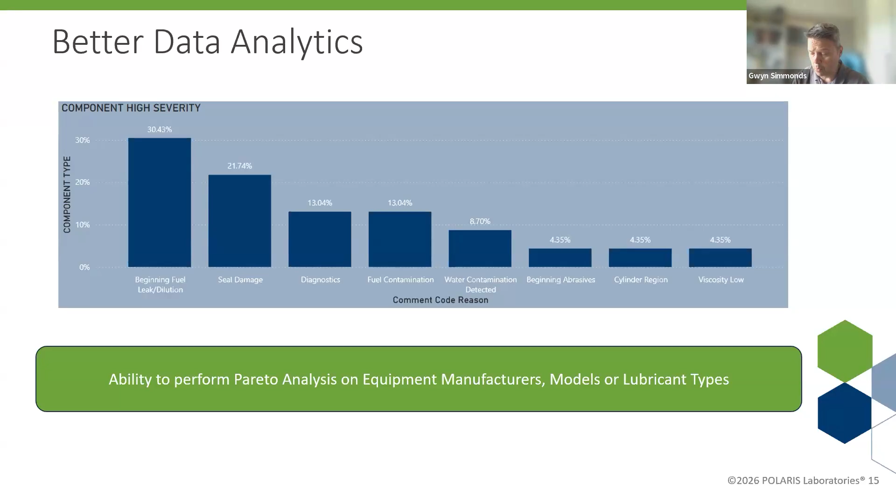So you can compare like for like with manufacturers, models, different types of lubricants and different kinds of systems. Having that complete data set really does allow you to perform things like Pareto analysis to see where that low-hanging fruit of potential lubrication problems are within your fleet of equipment.

And in terms of the current status, as Danny mentioned several times in his session, are we changing oil too early? You can't really determine how good the lubricant is without sampling, without testing. But if you have accurate information on the sample and the running time, it allows you to perform scatter plots and scattergrams to see what the condition of the oil is over certain time periods.

We change the oil at 500 hours — why? Because that's what the OEM says, that's what the fluid manufacturer says. Well, if after 500 hours all of the oil condition parameters are still at a satisfactory level, with no significant contamination or wear, then it really does allow you to safely extend or optimize your drain intervals. That could become apparent in coming weeks and months across all of your lubricant products, purely based on the data that the laboratory provides.

So to conclude, oil analysis does work, but it works best when complete information is provided to the lab on all samples. The information provided by end users to the lab directly reflects the flagging limits, but also the recommendations and the overall severity of that sample report.

One-off samples, like in the problem at the beginning, can help, but really routine, regular samples provide a much clearer picture of the condition of the equipment and lubricant, as the labs are able to trend and compare samples over time from historical statuses.

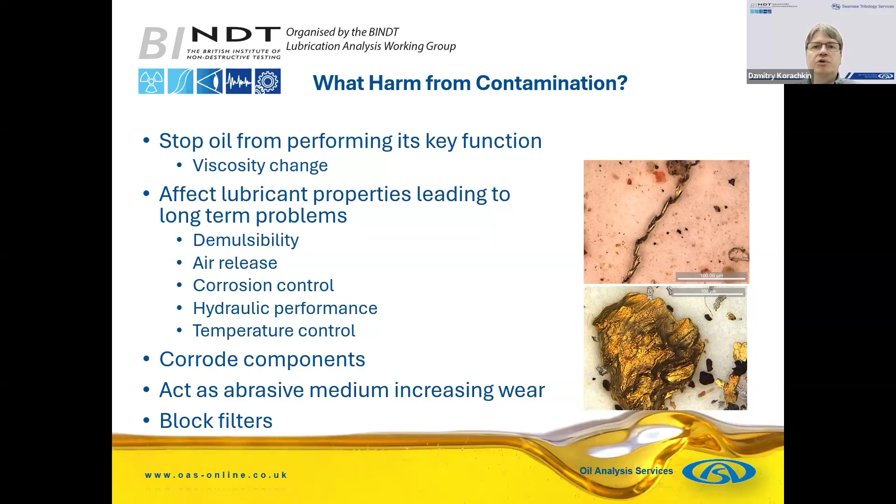So I'll speak about how we might want to look at contaminants, by maybe categorizing them in different ways, and each of those will give us a different perspective. How we can detect contamination using a lab to identify the contaminants, what some of the test methods that may be used, and give a few case studies, a few examples.

Generally, it's a bit like CSI, but unlike on TV, we're grounded in reality. So we may need to use different test methods for different types of contaminants, and we have to deal with the quantity of material available and the cost of analysis.

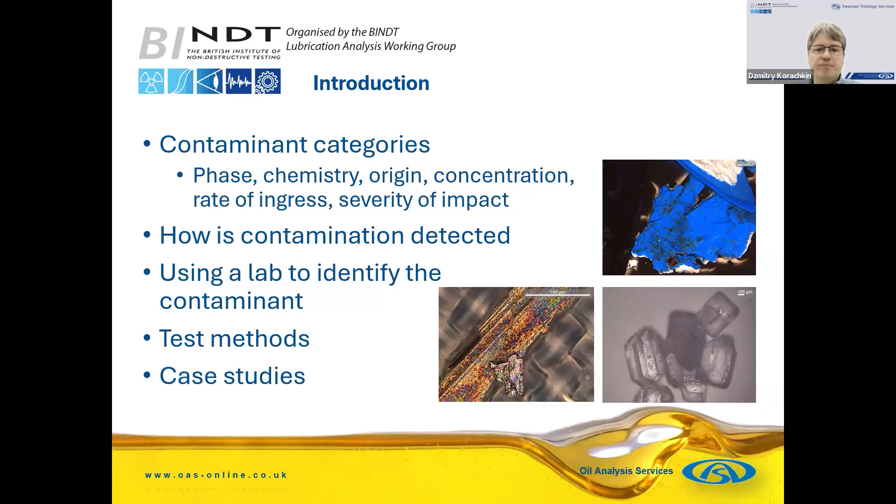So if we split the contaminants by phase, one of the main phases is the solids. So we have sand and grit particles, wear debris generated within the machine, but it becomes a contaminant immediately after that and can cause further wear. Things like rust, soot in engine oils, paint chips coming off the different surfaces within the equipment, maybe the painted surface of a tank.

Various process materials, powders, fibers, either environmental or from filter media breaking down. You can have degraded elastomers, hoses and seals, and oil itself as it degrades. It forms degradation products, varnish precursors. They may be soluble to start with, but they form insoluble particles which can deposit as varnish and lacquer, can block filters and so on, and they become another contaminant within the system.

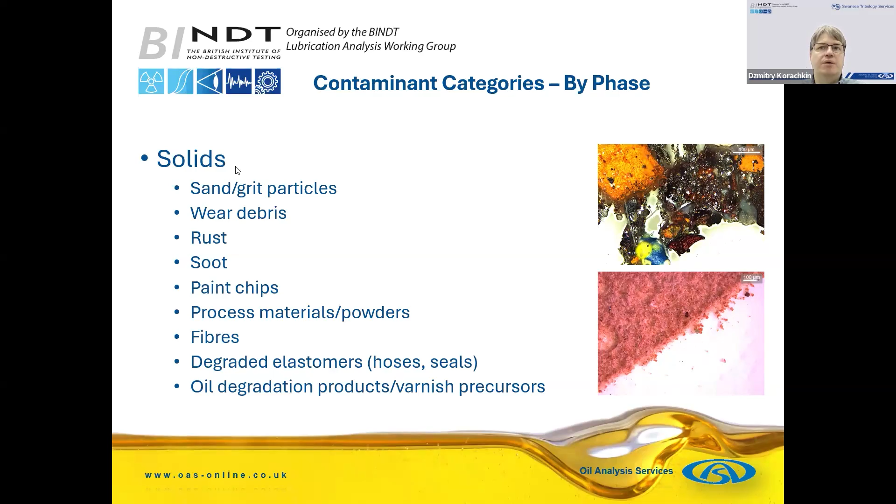Looking at liquids, one of the most common contaminants is water, but you also have things like fuel, coolant, AdBlue, using an incorrect lubricant, topping up with an incorrect lubricant, that's a contaminant as well. And when we get the first sample, if the lubricant grade is unknown, then the oil that's already in the system may effectively be a contaminant because it may not be performing its rightful function and may need to be replaced. But also process fluids and maybe detergents used to clean the area and then getting into the system.

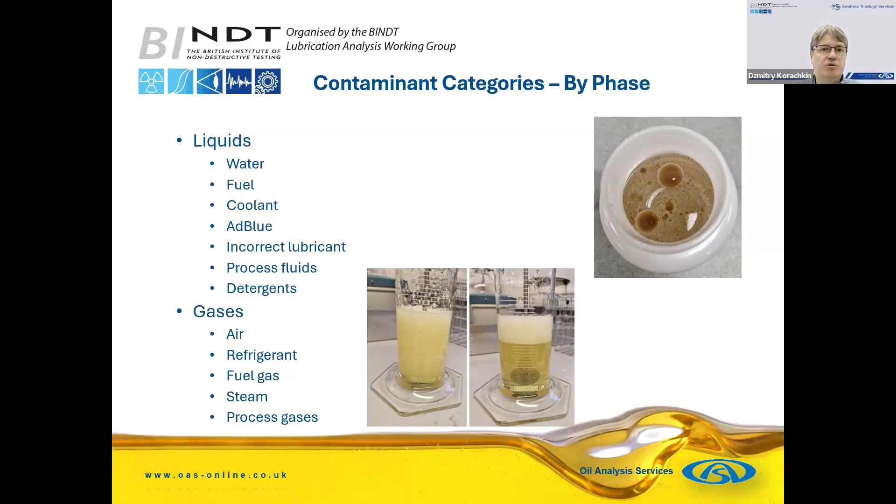You also have gases, things like air, refrigerants, so compressor oils have a lot of refrigerant gases coming in, maybe fuel, steam, vapor. Yes, it condenses once in the oil, but it's a gas coming in, and then various process gases. So whatever it is that you may be compressing, your compressors can be getting into the compressor oil and causing issues.

So we can also break contaminants down by chemistry. We look at organic contaminants, so various fluids, oils, fuels, various process fluids. We're dealing with hydrocarbons, they are organic products, grease, fibers from filter media, cellulose fiber or organic material, various plastic or elastomer debris from O-rings and seals and hoses, and organic in a different way, but biological contamination.

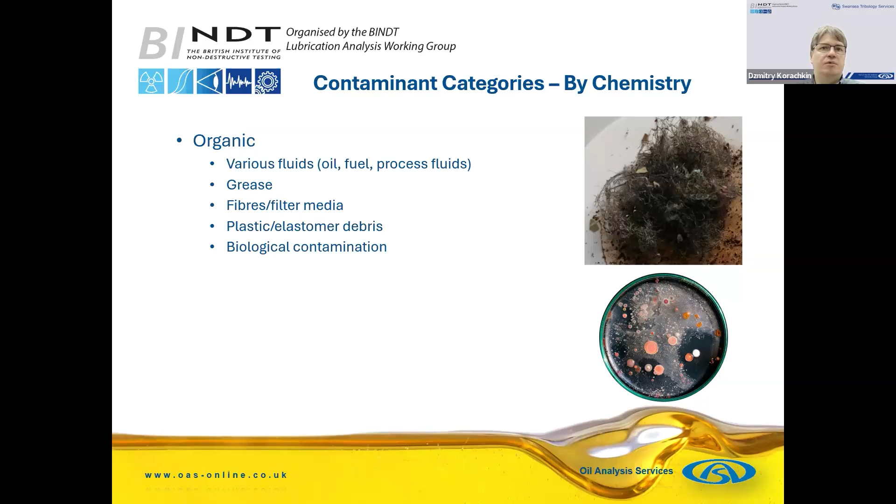So when we're looking at diesel fuel, for example, we can get diesel bug, but also that's something that can come into lubricants, especially when there's a lot of water present, and that can cause problems because there will be sludges and contamination that can clog up filters as well. Inorganic contaminants, so a lot of it is particles, sand, grit, wear debris, various process dusts, other inorganic debris.

And we can look at aqueous contaminant as being a separate class on its own. So water, coolants, AdBlue again, various detergents like screen wash in vehicle applications, various water-based process fluids. And all of those different chemistries require different approaches, different techniques to detect them and identify them.

We can look at contaminants by origin. Is it something that's coming from within the system, be it wear debris, breakdown of things like hoses, oil itself breaking down, the degradation product from oil? It could be external, things like water, fuel, coolant, dust, dirt. Adding an incorrect lubricant, it becomes a contaminant.

And another way to look at contaminant is by concentration. Is it bulk contamination? You know, we have 10% fuel in this oil. Is it a mixture of different lubricants? We have 50% of one lubricant, 50% of another lubricant, a lot of water getting in. Those are often obvious. There are significant effects on many properties, but also sometimes you can visibly see two layers within the sample, where at the bottom you have maybe a layer of water or a layer of different lubricant that has different densities, so they separate, so things can be obvious.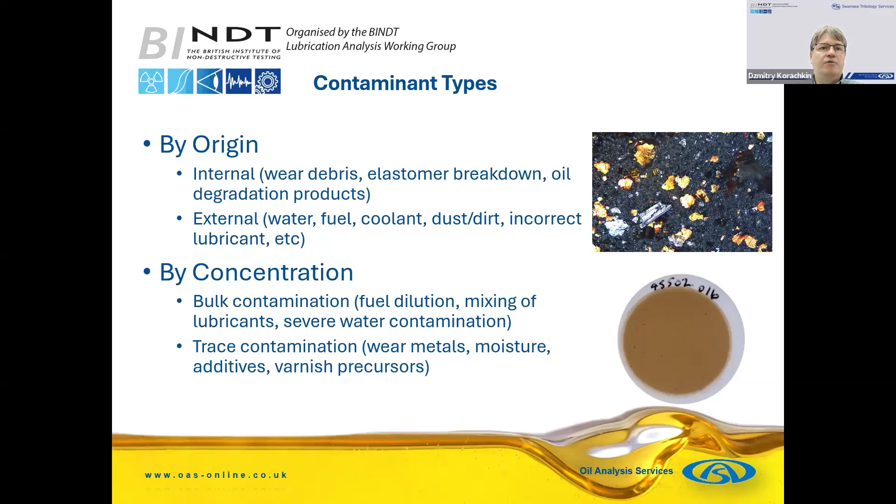But we sometimes need to look for contaminants which are present in very, very small quantities, concentrations. So trace contamination, this can be wear metals, moisture again. Some systems are very sensitive to water content, so being able to detect it at a very early stage, at very low, unquantified levels, like we were saying earlier, parts per million rather than percentages, and sometimes even 70 parts per million in an application may be considered too high. But also ingress of additives as an indication for different lubricant getting in, and the varnish precursors as well. They're present in small quantities, but they can cause various problems.

We can look at contaminants by rate of ingress. Is it gradual? So normal wear particles, maybe water ingress through condensation, slight coolant leak, the degradation of oil, the buildup of the insolubles, soot buildup, and then ingress of dust and dirt, perhaps through breathers which don't have filtered breathers on, or it could be rapid.

So a known water contamination event, somebody was pressure washing something and lots of water got in straight away, or there's a head gasket failure in an engine, or somebody just put in an incorrect lubricant, topped up, and immediately we have a bulk change, which is very rapid. Ingress of dust and dirt in a more rapid way, or a severe wear event which generates a lot of wear. And then we can look at it by severity of impact. There is some contamination which is going to have moderate impact, slight impact.

So things like normal wear, it will build up. It may start becoming a problem by itself, but it will take time. A moderate fuel dilution, we're detecting a contaminant, but it's not causing a problem yet. It's very gradual ingress of fuel, for example, gradual buildup, or addition of a lubricant that's actually compatible and can work with a lubricant already in the system. We may detect it and decide we know it's okay, or we may perform a compatibility study and confirm that it is okay, so that we are sure, and then carry on.

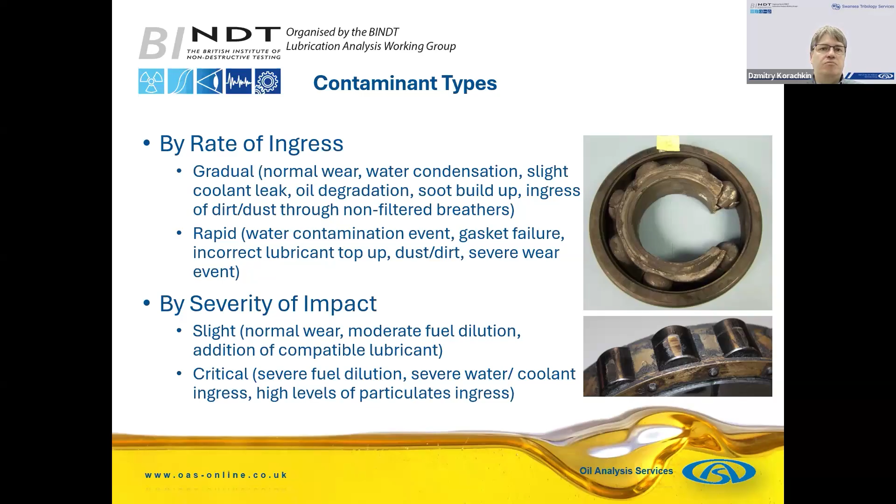But you can have critical impact as well. So severe fuel dilution reduces viscosity, can cause rapid wear of your engine, severe ingress of water or coolant. Again, the lubricant layer is broken down, oil is unable to carry the load between the loaded surfaces, and you can have critical consequences of that. High quantities of particulates getting in can act as an abrasive component, causing severe wear and rapid failure.

So how might we detect contamination? There may be a known contamination event. Somebody thinks, oh, I may have put the wrong oil in, or we know they used a pressure washer in this area and water is likely to get in, or there was a leak in the roof, and we know water was pouring down onto our piece of equipment.

Maybe visual inspection, either through an oil sight glass where we can see there's discoloration, cloudiness, or changes in appearance of the oil, or we may see contamination on the surface of the equipment, or we may see that the hatch to the oil tank is open, and this will likely allow some contamination to get in.

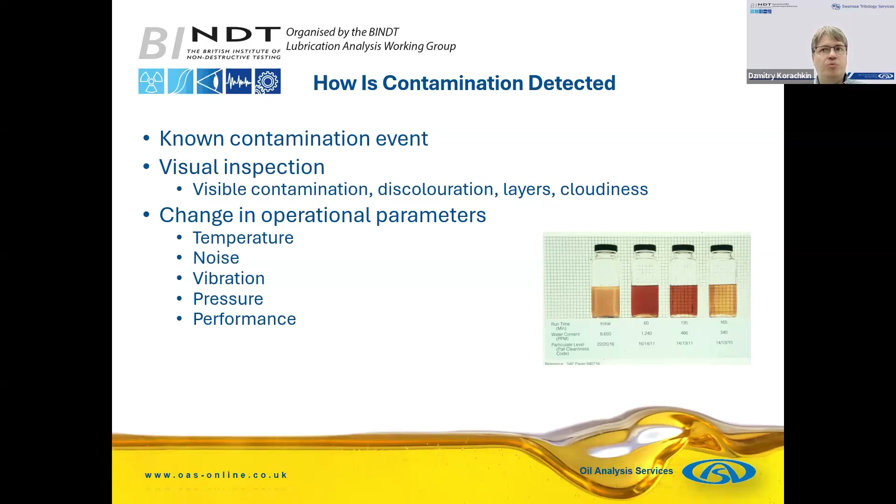There may be operational parameters where you may be monitoring temperature, noise, vibration, pressure, various other performance parameters, and all of that may change, and that change may signify, may be caused by ingress of contamination. You may not always know about it, but it may prompt you to find out what's going on.

And then another potential avenue is through routine lubricant analysis. Either the lab has detected contamination directly, for example, increase of moisture or water content, or we notice the change in property, viscosity, or perhaps the emulsibility, air release, something that can be affected by contamination, and then we may want to investigate and find out what the actual contamination is, having detected its presence in an indirect way through a property change.

So if you are using a lab to identify the contaminants, often we have customers come to us with one tiny sample of something and say, oh, can you find what the contamination is, what is it? And there is no context, nothing to compare to. So they come to us when they're desperate and want to find something out after they've taken some steps. It would be great if they involved us early and spoke to us about the best way to investigate this situation.

So when you send a sample to the lab talking about contamination, you may give your suspicions, or we think it's that, but remain open-minded and allow the lab to suggest test suites, which may do an overall condition check.

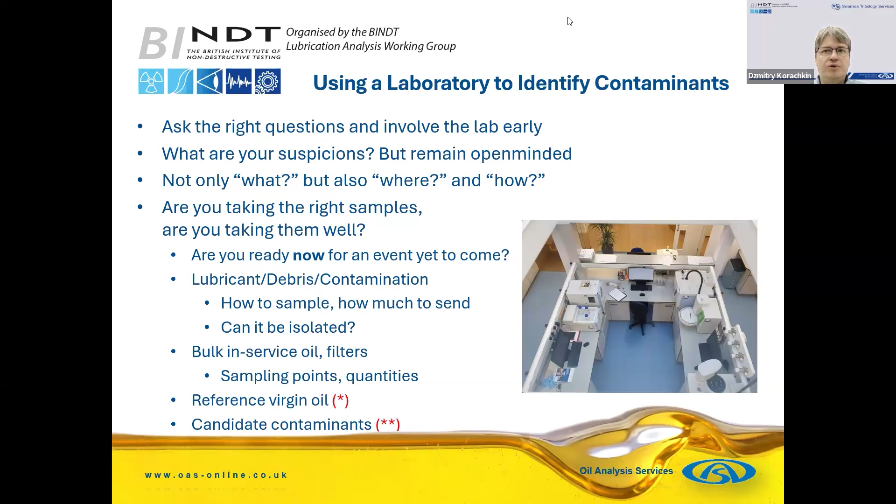Discussing what tests may be used, there are some tests that everybody familiar with oil analysis will think of straight away. But speak to the lab, describe the problem, ask them if there's anything else they can recommend, because sometimes there may be multiple tests which can help isolate a contaminant, narrow it down, and confirm whether it's this or something similar - it's useful to discuss things like that with the lab.

Sometimes the lab may be able to prepare a synthetic reference to simulate the contamination. If you think there's a certain amount of one product getting into another, you can supply those neat products together, we mix them and then compare with the unknown sample to see if it's similar to that mixture. In some situations it's not always possible to fully understand what the contaminant is, but you may be able to eliminate a lot of other things and determine the contaminant is not this lubricant, not this grease, not detergent fluid.

You could also use this opportunity to assess the condition of the oil - whether it's still good, still able to perform its function, even though there is a degree of contamination in it, because the contamination present may not affect the key properties. You have detected something, but maybe it's a compatible lubricant.

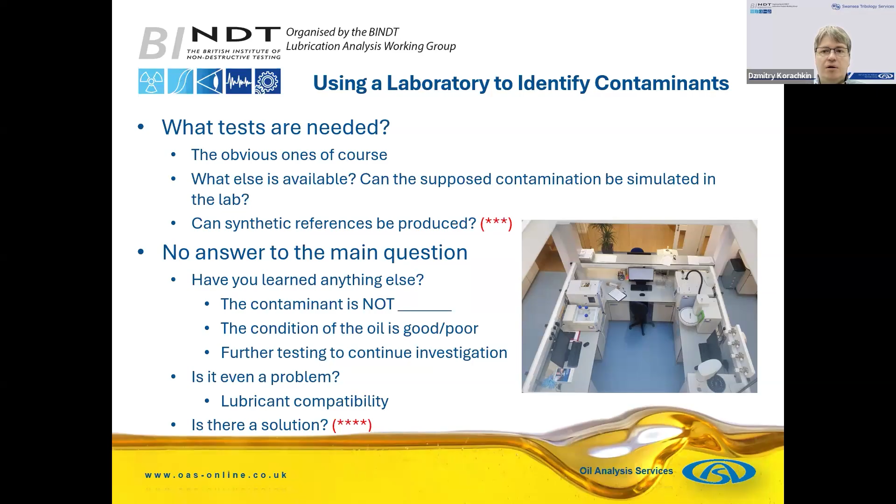Moving on to a few tests: visual appearance and color may be indicative of contamination. Viscosity can help detect fuel dilution, incorrect lubricants, process fluids, and degradation of oil such as oxidation or cracking. Flash point is for detecting fuel, gas, or sometimes incorrect lubricants. Density differs between different lubricants, process fluids, and fuels.

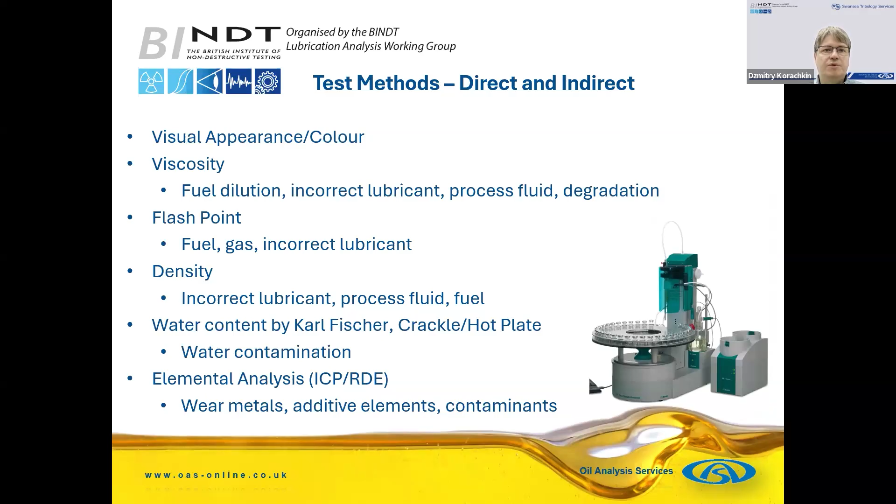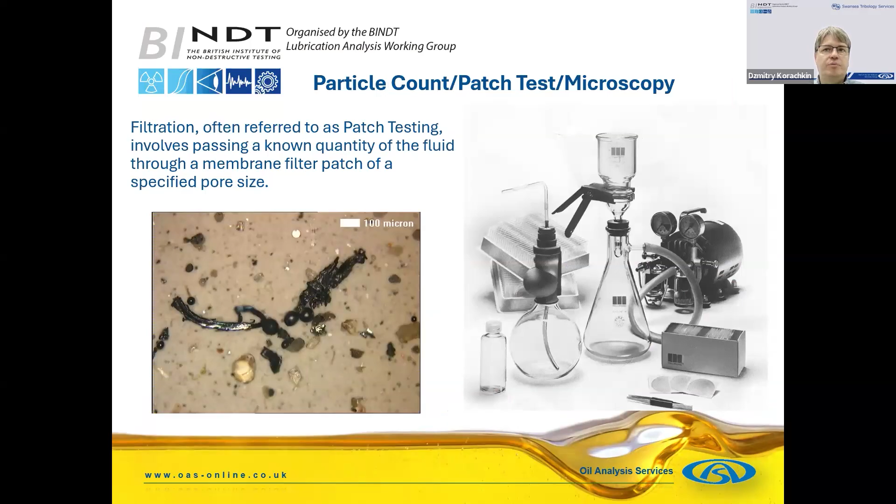Water content can be detected directly by Karl Fischer titration, crackle test, hot plate, infrared, and so on. Elemental analysis uses either ICP or rotating disc electrode, looking for wear metals, additive elements, and contaminants. Particle count may help detect ingress of particulates, but it's also useful to separate more solid contaminants, sludges, or fibers onto a filter membrane for further examination, either microscopic or otherwise, where you're able to see quite a lot of difference between the different contaminants.

You can also use things like scanning electron microscopy, which is very good at analyzing the elemental composition of individual particles, of particle populations. So you can find out that 30% of the wear debris is of this metallurgy, which leads to a particular component. 20% is of a different metallurgy, so there's another component that's also wearing. This works for inorganic contaminants, wear debris, that sort of thing.

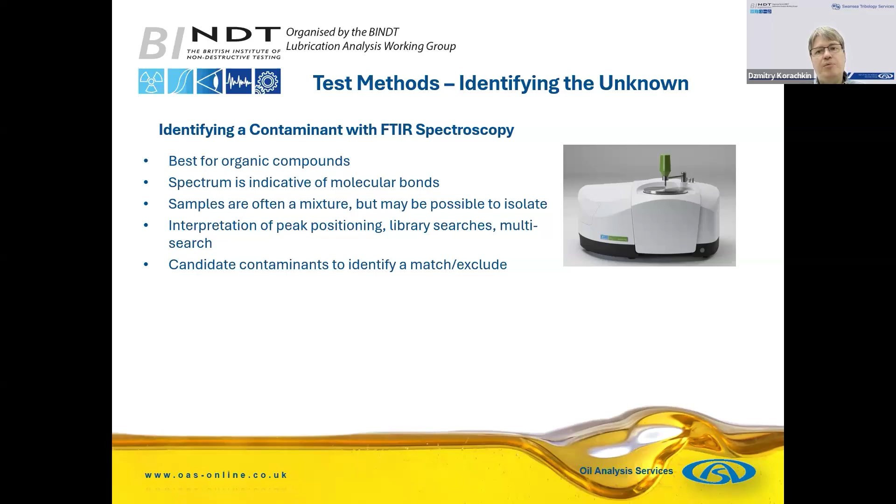Another useful method is infrared spectroscopy. This works best for organic compounds. The spectrum that's produced is indicative of molecular bonds present in the sample. When samples are a mixture, it may be possible to isolate the samples and test each component individually. We also have access to previously tested samples, library spectra, and can not only identify a contaminant, but we may be able to exclude certain contaminants.

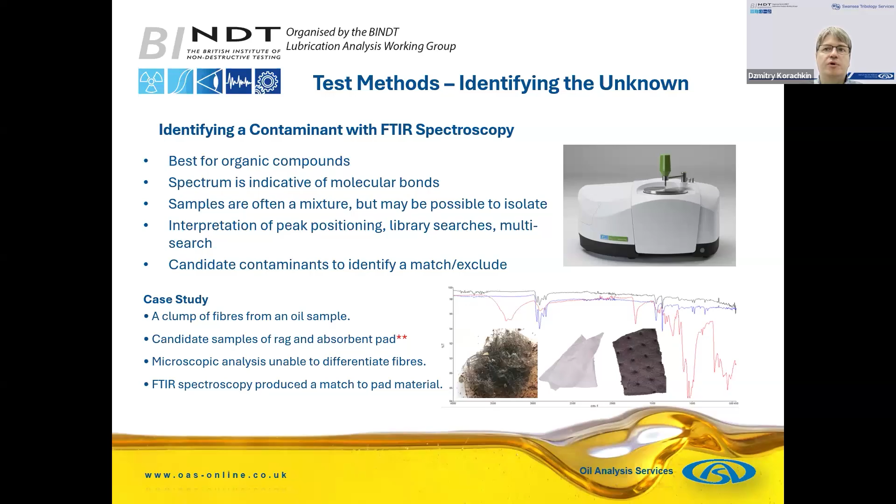As a case study, we had a customer come in with some fibers that we found in the oil system. They brought us some rags and a spill kit, and we were able to perform analysis and identify that the pad material was a match to the fibers and the other material was not. So they were able to identify where the contamination was coming from.

Another case study, we had suspicion of seal oil getting into the lubricating oil. We performed infrared analysis, some other tests, and they provided us a sample of virgin oil. We found that the virgin oil sample they provided us was not matching the expected grade, and that's why the viscosity was different.

So we used infrared spectroscopy as well to check the contamination, the concentration levels of prepared test mixtures of lubricating and seal oil. We were able to predict it with a high degree of accuracy, and we were able to confirm that there was actually no seal oil in the lube oil, and that the fault was entirely due to an incorrect lubricant being used.

Another example of detecting contamination through a property change: we had an oil sample where, after a long time of good demulsibility performance, we had a sample with poor demulsibility. So instead of demulsifying after 210 seconds, after 1200 seconds there was still 5 milliliters of oil separated.

We repeated with follow-up sampling just to check and make sure there were no issues, and the result held. One of the things we noticed was very low levels of calcium and silicon in the system. Demulsibility of oil is a property that can be sensitive to very low concentrations of certain contaminants. So this information gives the customer a chance to investigate and find out where the contamination may be coming from.

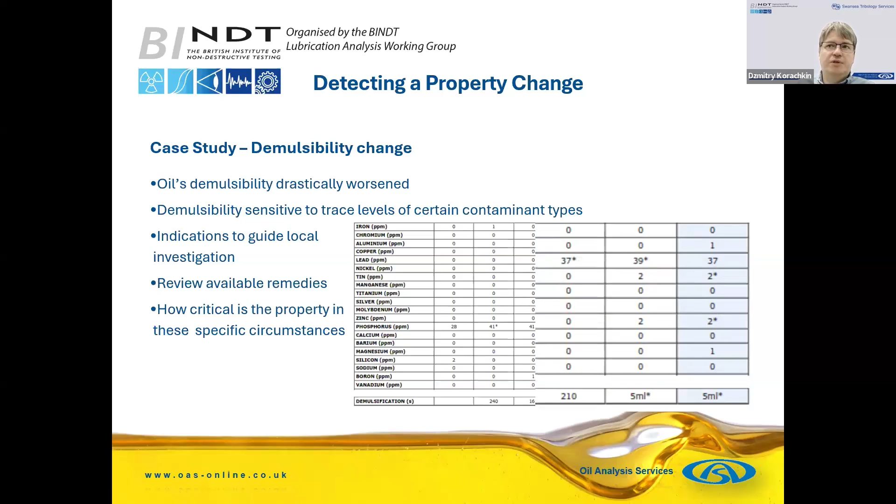So we saw, as I said, a little bit of calcium and a little bit of silicon, which initially did not strike us as particularly high and abnormal, but once the problem was confirmed we investigated further, and that was a possible cause for the demulsibility problems.

Finally, when a lab is trying to help, they may be able to give you advice not only on what the cause of something is, but sometimes a solution. We spent some time investigating a situation where some waste oil was turning into a solidified gloop, which could not be used, and then it became very expensive to dispose of. Whereas when it stayed liquid, it could actually be used as a supplementary fuel in coke ovens.

We performed a lot of testing, and we just could not identify what the problem was, whether it was specific contamination or whether it was just a different initial product coming in. There were just too many variables at the time. So with the client, we were able to come up with a solution of adding some waste diesel, degraded diesel that they had available on site, and that allowed the fluid to stay liquid and stopped it from solidifying, and they were able to successfully use it as a supplementary fuel.

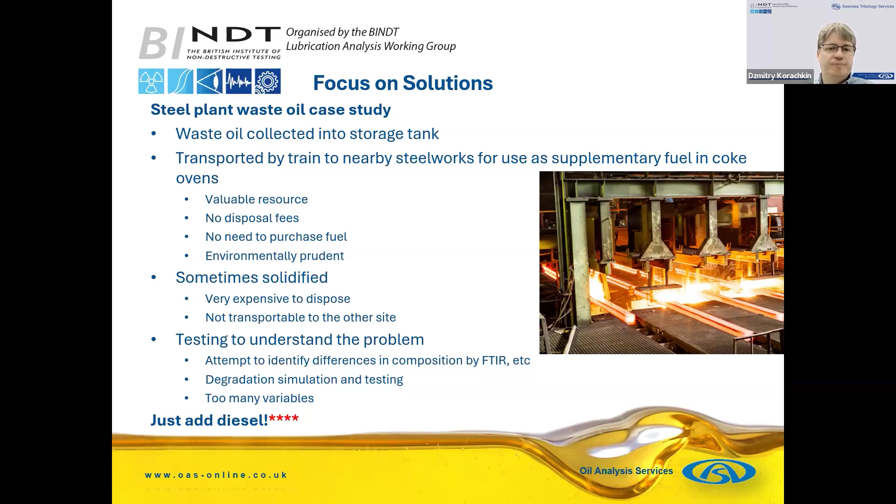Thank you, and I think we will be able to take questions as a panel later on.